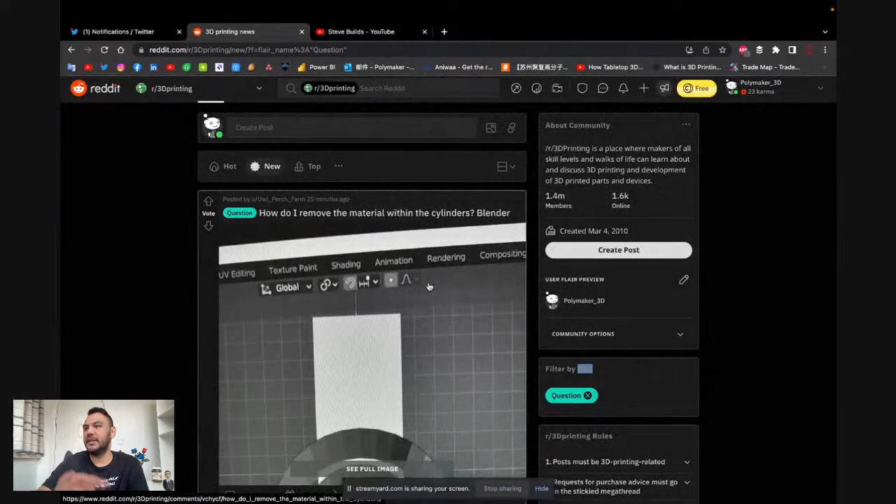Reddit. I don't think it's 3D print. Is that this one? Yeah, it's this one. They have like thousands of questions every week on this one. They have the question flair, I guess. I don't know why they call this flair. What's that? Does that mean topic? Flair definition: a special or instinctive aptitude or ability for doing something well. Okay, I don't know why they call this flair, but anyway. So if there is no specific question, then I will do like last time. We just go through Reddit, and then we answer all of the questions there. So I think we're good to go.

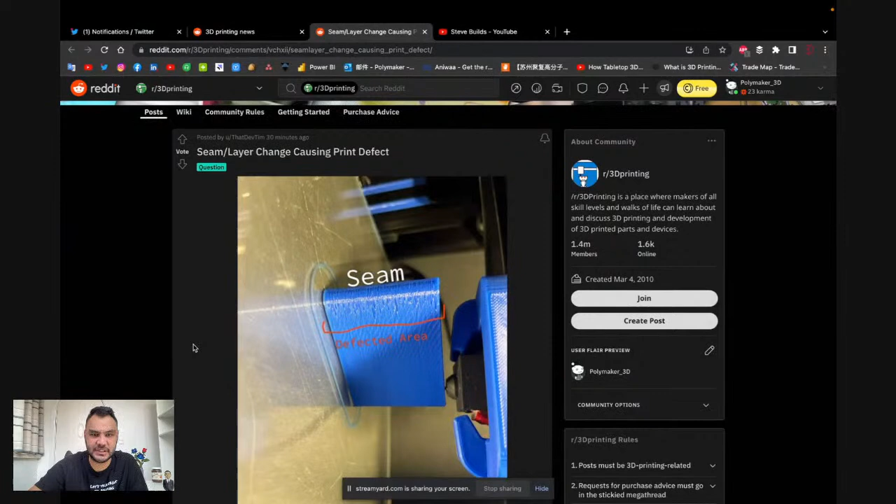Okay, so that's the defect area. Okay, so it looks like, yeah, I've seen this a lot. When you finish your layer, then it's under extruding, so you can see that it's actually starting to under extrude before it even finished the layer. And every time I see this, oh, by the way, you have some warping as well, looks like.

But when I see this, I'm always wondering whether it's the starting of the layer or the finishing of the layer. Is it the nozzle that has difficulties to build up the pressure when starting the layer, or is it the nozzle that has the extruded amount that is not enough to finish the layer? So let's see if there is a little bit more information.

Any help with me? I've done many Google research, not available, specific problem, blah, blah, blah. Looks like under extrusion and retraction so far. Okay, some stuff about retraction. Lower retraction, turn off coasting. Yeah, so they all assume. So my first question when I see this is always the same, because I've seen this a lot. And usually it's the end of the layer, usually.

Hi, Plastic Guts. Do you know which of your filament is the best for annealing? Which of the filament is the best for annealing? What does that mean? Sorry, I don't understand your question. Annealing is a process. How can a material be good at annealing? Do you mind putting a little bit more detail? I mean, there's a lot of material you can anneal for different reasons, right? Some for crystallization, some for releasing internal stress. But I don't understand what you mean by which one is the best for annealing.

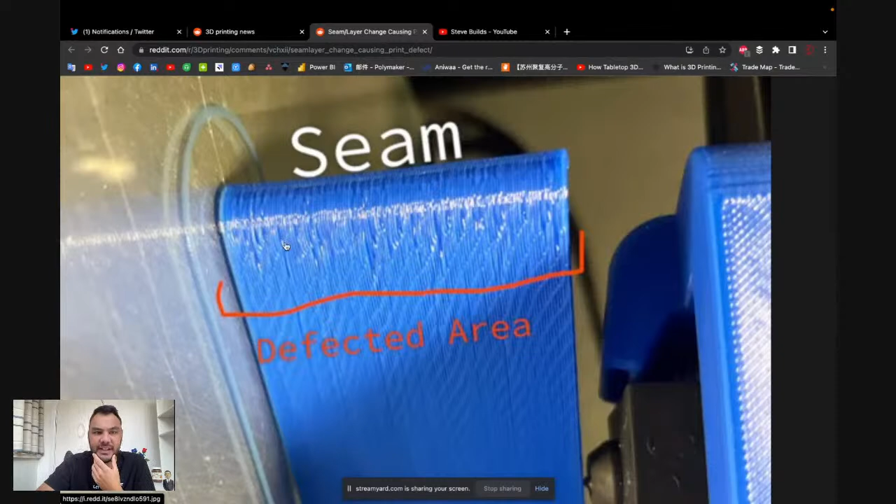Okay, so again, that's the first question I would ask, but it seems that nobody asked. So let's assume this is the end of the layer, right? So if it's the end of the layer, that means the pressure, the extruded amount is not enough. So it could be, let me check. It's definitely the material not enough to finish the layer. But what could be the reason of this type of under extrusion?

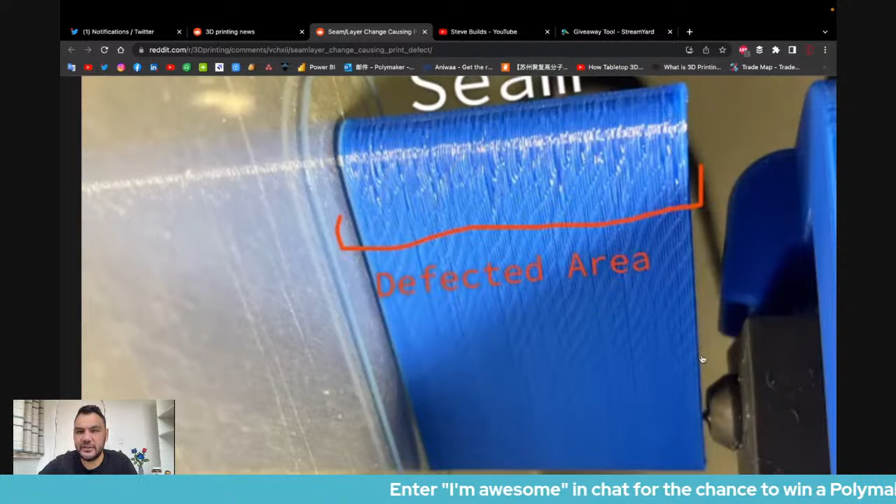If it's the end of the layer, I'm not too sure what could be the problem, but usually it's the end of the layer. And you know how you can check that? Actually, I think the ridges here on the side could indicate that it is going this way. So it looks like it's the end of the layer. But coasting, I don't think it's coasting, because coasting is usually a few millimeters, but it's starting to under extrude like a few centimeters before. So I'm not too sure. Let me check.

Okay, having a metalworking background myself, I know annealing as meaning to soften the material. I've noticed that in the 3D printing community, people use the term annealing to refer to baking their print to make it stronger. Okay, so your question is, which material provides the easiest, most user-friendly annealing?

Yeah, again, I'm not too sure. I've noticed that in 3D printing, people use the term annealing to refer to baking their print. Yes. So annealing in 3D printing has two meanings. Meaning number one, if you are dealing with semi-crystalline material, you put it in the oven and then you crystallize the part. So this is for semi-crystalline, and crystallizing the part will increase the heat resistance and some of the mechanical properties of the part.

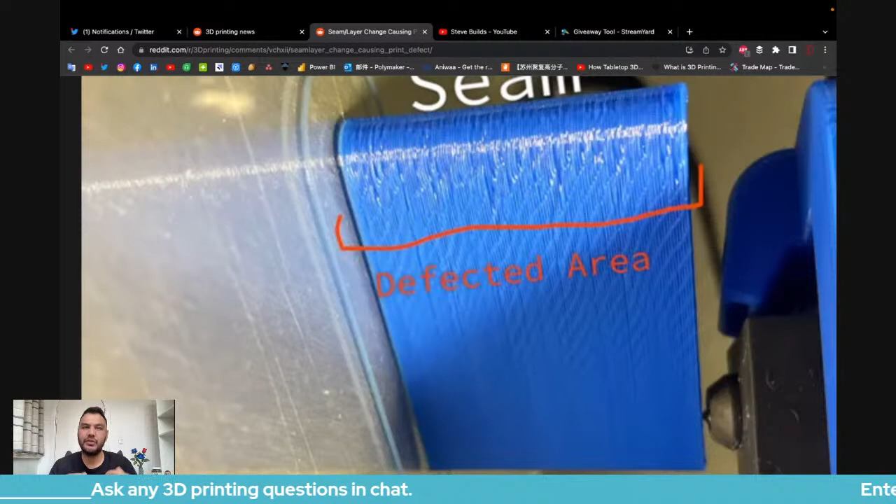For example, which one? I think our Polylite ASA white. If you notice, it has like a painting look, and because we had to make it very white, we had to increase a little bit the concentration of master batch.

Yes, I did mean which one would create the strongest mechanical properties. Okay, then again, one of the high performance materials, like maybe high temperature nylon or PEEK or PEKK or this type of polymers.

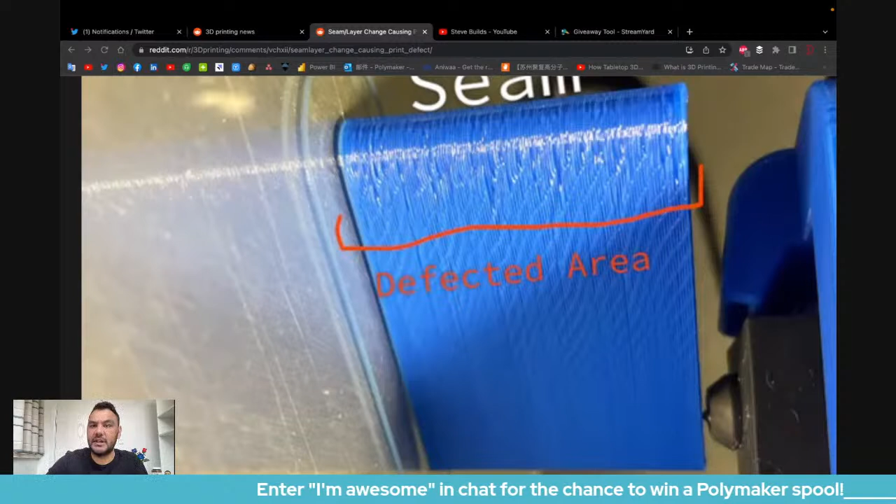No, you're not stupid. I just wanted to make sure I understand the question well. Is annealing two parts printed with the exact same settings going to result in the same dimension changes? Yeah, if it's the same material, if everything is the same, then yeah. If your printing setup is the same, the G-code is the same, the material is the same, and you anneal both, then they will both shrink in the same way. If it's for crystallization, then it will shrink. If it's for stress release, usually it doesn't change the dimension much.

Hey Caleb, am I late?

No, you're not late. Again, I don't know if you have some suggestions, but if this is the end of the layer, to be honest, I don't have a clear idea of what could cause this. In my mind, it starts the layer, no problem, then it goes all around, and suddenly, for some reason, it stops extruding properly. The G-code command is, you do your edges, and there is the right amount of material extruded. But for some reason, for the edges at the end, it doesn't have enough. So I'm not too sure what could happen here.

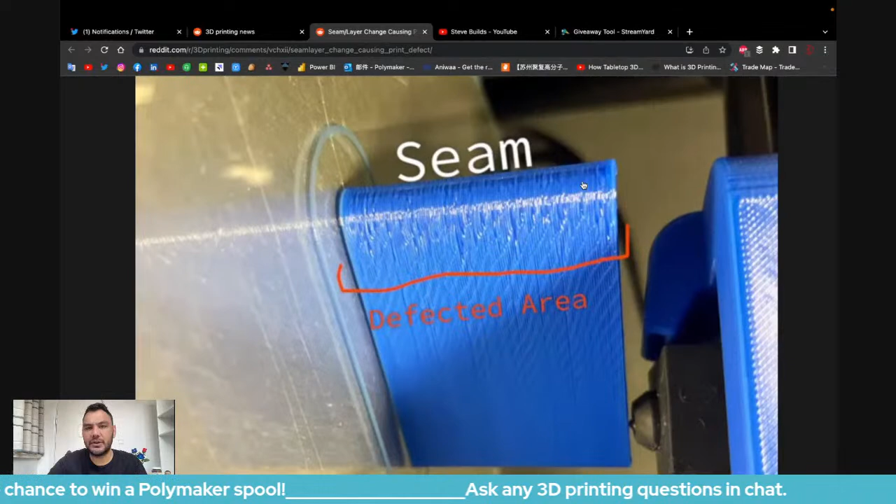Usually, when I see under extrusion, I recommend raising the printing temperature, and that usually solves the problem. So if a user comes to me with this, I will usually recommend the printing temperature. If it's the beginning of the layer, then I will talk about retraction; you need to be careful with retraction. If it's the end of the layer, I will usually only talk about the temperature, because I don't know what other things could affect this. Coasting, I don't think so, especially with that bad defected area.

Yeah, linear advance could be, but that's pretty severe, right? Or you have linear advance and it's not calibrated at all, and then you have this issue, because linear advance usually doesn't deal so much with under extrusion. I mean, yes, under extrusion, but not that severe. It deals with the thickness of your line width, right? But if it's that big an under extrusion, then there might be something else going on, or your linear advance is reversed, or it's completely not calibrated properly.

But I don't think he is using linear advance. Otherwise, I think he would have figured it out by himself. So that's my guess.

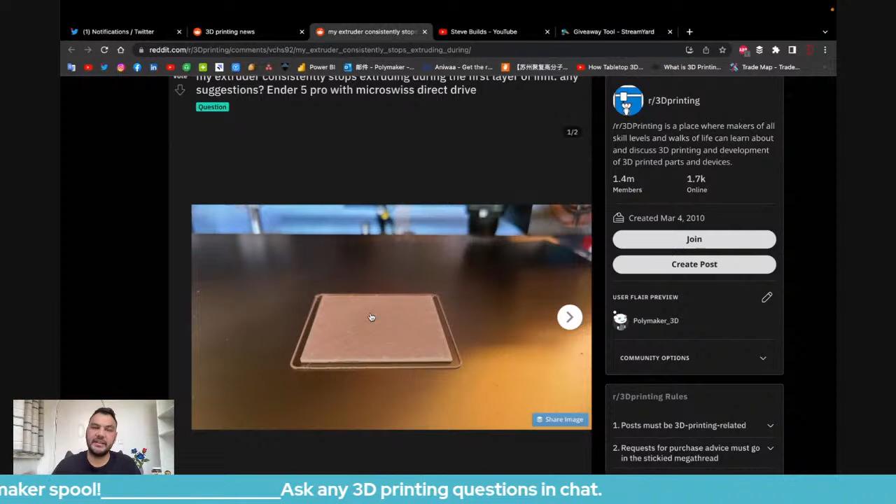Next one. My extruder consistently stopped extruding during the first layer of infill. Any suggestion? Okay, so what usually happens here is when you have your bottom layer that prints very well, and then... I'm dropping a little bit, but I should be back now.

So usually the bottom layer will have a certain speed, like 30 or 40 millimeters per second. I'm not talking about the Voron, right? I'm talking about a regular standard printer. The bottom layer should be around 30 to 40 millimeters per second, and then suddenly the infill is going to ramp up to 60, 70 millimeters per second. And usually, if your temperature is not right, it's not going to keep up with the speed. So what I would recommend here is to raise the temperature or lower the infill speed.

So the best here is to do the CNC Kitchen test so that you know exactly what your printer is capable of. And then you can check your G-code, or you can check your preview to see if the volumetric speed of your whole print is within what your printer can do. So that's the best way to solve this issue.

Just popped in to show support. Thank you very much, Vice. And I know I owe you some answers.

I'm getting there. I see wood graining, extruder vibration ending up in the print.

Do other people have issues with silk filament jamming? Yes, there are a lot of people that have this issue. Multiple reasons. There are some silk formulas that are more flexible than regular PLA, and sometimes the extruder has difficulty dealing with that flexibility. The other thing, if you're talking about our silk, especially if you're used to our regular PLA and then switch to our silk, there is a major difference.

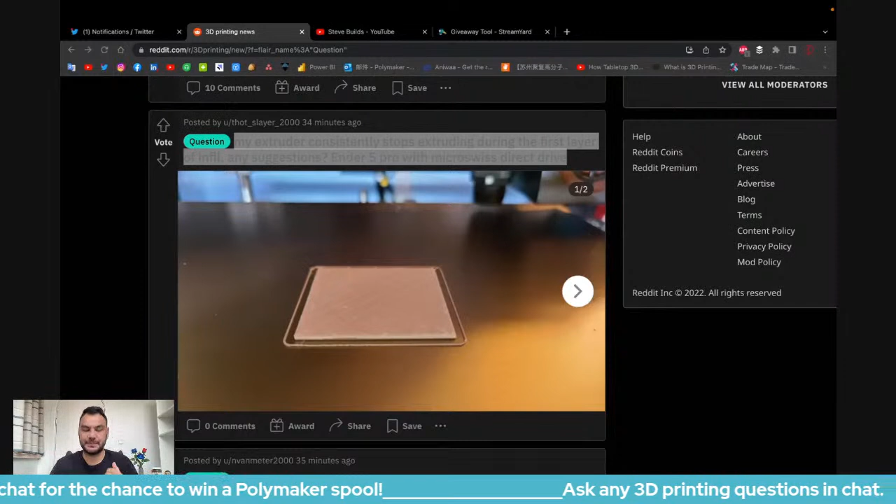Our regular PLA has jam-free technology, which means the heat resistance of the filament itself, not the printed part, is 140 degrees. So this PLA can be printed in an all-metal hot end or at a very high temperature without having too much heat creep issue. But the problem with our silk is that it's a regular silk. It doesn't have jam-free technology. So if you're used to printing with our PLA and then suddenly change to silk, you have to be more careful with heat creep than with our regular PLA.

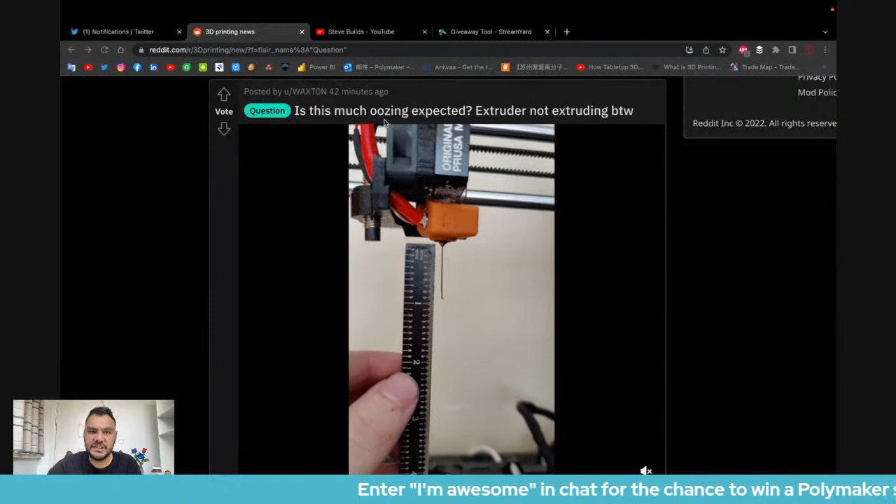Is this much oozing expected? Extruder not extruding, by the way. Well, it depends. It's hard to, in this case, let me think. So this is interesting. We can try to understand why the filament would be extruded but the extruder is not extruding, right? Do you remember we were talking about if you extrude a certain amount, then you have the same amount that comes out? And now we have nothing that is pushed in, but we have something that comes out, right?

So in my mind it's like this: the system had pressure. You can think about the printer extruding the filament, and then the nozzle slowly cools down to a point where it cannot extrude anymore, but there is still pressure from the extruder. So even if the extruder is not moving, you still have residual pressure in your setup. Once you start a new print, you raise the temperature, and as it rises, all of that residual pressure will be enough to start extruding the filament.

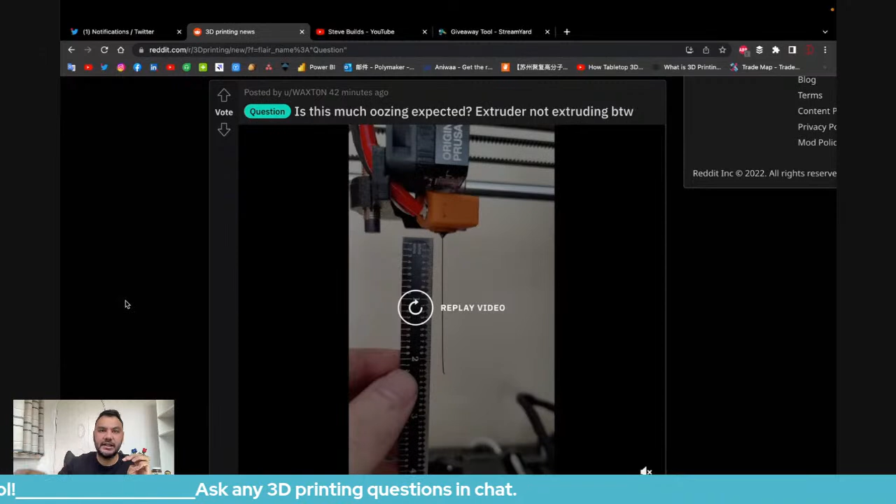So whether it's expected or not, I don't call this oozing, because during 3D printing you are going to do a retraction. If you do a retraction before and then check the oozing, that's the kind of oozing you could check if you are designing a new shape of nozzle. Remember last time we said nozzle design is very important for oozing? Then you can do this test, but don't just heat up the nozzle and check what's coming out. You have to do a retraction before, get rid of the residual pressure, and then check whether it's big or not.

Wouldn't that be dependent on the viscosity of the molten filament? Yeah, definitely. You have a residual pressure, and the pressure required to extrude the filament depends on the filament viscosity. When you start your G-code, one of the first commands is to heat up the nozzle. As it heats up, the viscosity goes down, and at some point it's low enough that the residual pressure can push the filament out, extruding more and more until you reach equilibrium inside, and then it stops extruding.

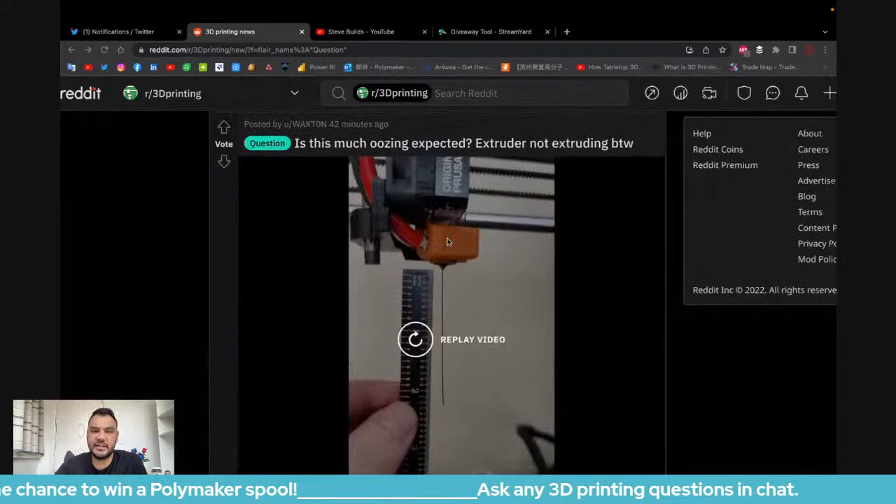What I do to avoid oozing is do all my calibration with the nozzle at 180 degrees, then only heat up directly before my purge line. Yeah, I'm not sure if we call that oozing at the beginning, but I guess yes. I guess that's the beginning-of-print ooze.

And when you have a small island, the flow is much harder to manage. And in this case, you're printing a marble, so it could be that in this small island it is much easier for the marble to accumulate. Why? Because you're extruding a little bit, so you're pushing, and then you are retracting, pushing, retracting. So you're kind of accumulating all of this small powder in the nozzle, and maybe it can partially clog your nozzle, and then once you re-extrude again, it will be fine again.

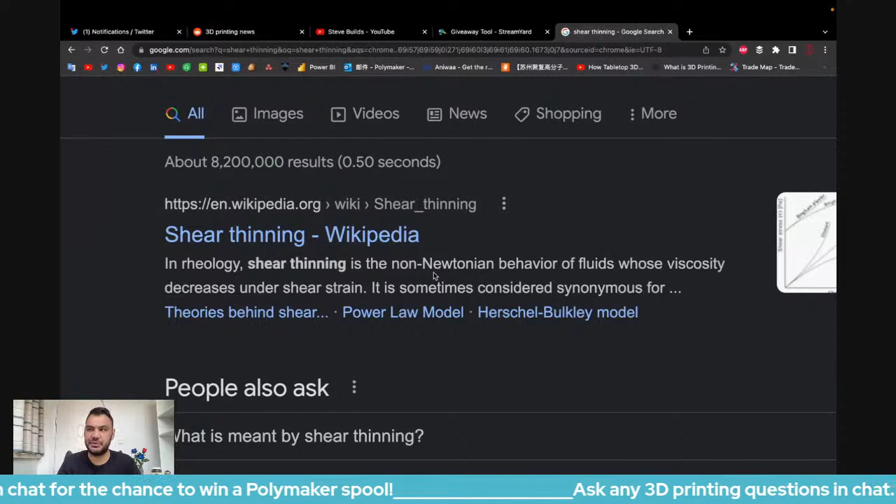The effect of shear thinning for Polytera is higher than regular PLA, which means Polytera would require a lot of shear stress in order to flow properly. And what does that mean? It means that if you stop extruding, then it won't ooze, not as much as other PLA. So you don't need a very high retraction. So that could be the idea. That would be the first thing that comes to my mind on why Polytera would require less retraction than a regular PLA for the same result.

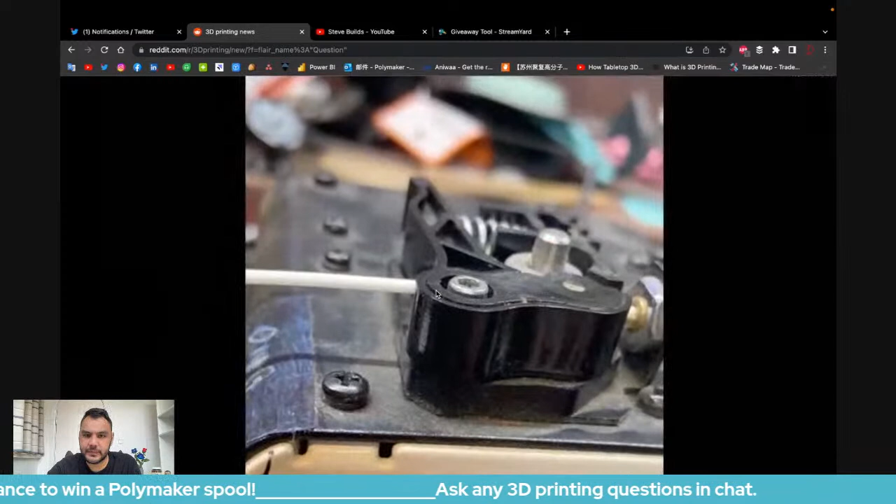New to resin, why does the filament keep jumping? Oh, okay. So extruder skipping. Extruder skipping means the viscosity of the filament is too high to be pushed at that pressure. So again, you do the CNC Kitchen test so that you can understand the limitation of your printer. You have that, or you have a nozzle clog, or a nozzle jam. Jamming means the material expanding in the cold end, and a clog means you have a carbonized polymer in the nozzle that is clogging it, or he's printing with marble or any particular effect filament. So it could be one of these.

Either your printer has reached its limits, or your printer has jammed in the cold end, or the nozzle clogged. So it's one of these, so you can check. Or the nozzle is too close to the surface. Yeah, that could also be it, basically something is blocking the exit of the nozzle.

Hi, I'm new to 3D printing. Can someone help me fix this problem of shifted levels? My specs are in the comment. Thank you. Shifted. Okay, so I guess he's talking about the layer shift, right?

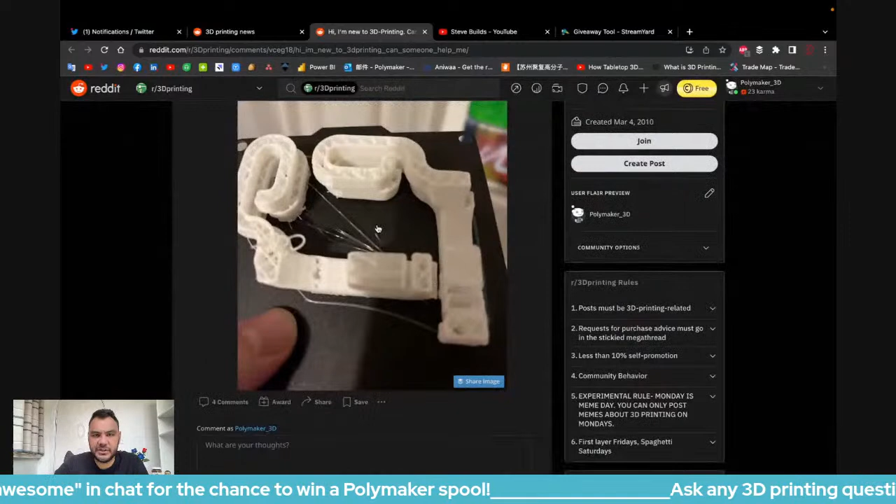It could be a very weak stepper motor that didn't handle one of the jerk moves, which means the instantaneous speed change at some point, and then they just skipped, or the nozzle got caught on a curled surface, and if the stepper motor is very weak, then it doesn't take much for the stepper motor to skip steps. So I would lower the jerk. I would double check if there is any curling on my print that could have caught up in the nozzle, and then that's how I would solve the problem. But I think mainly it could come from the printer.

What I guess is the print that came out fine most likely was some small print. When you have a bigger print, then you have a higher risk of having that layer shift issue. That's my guess on this problem.

Okay, what is this? See full image. Well, how are we supposed to troubleshoot this image? There's nothing. Most likely his problem is a camera problem, not a printer problem.

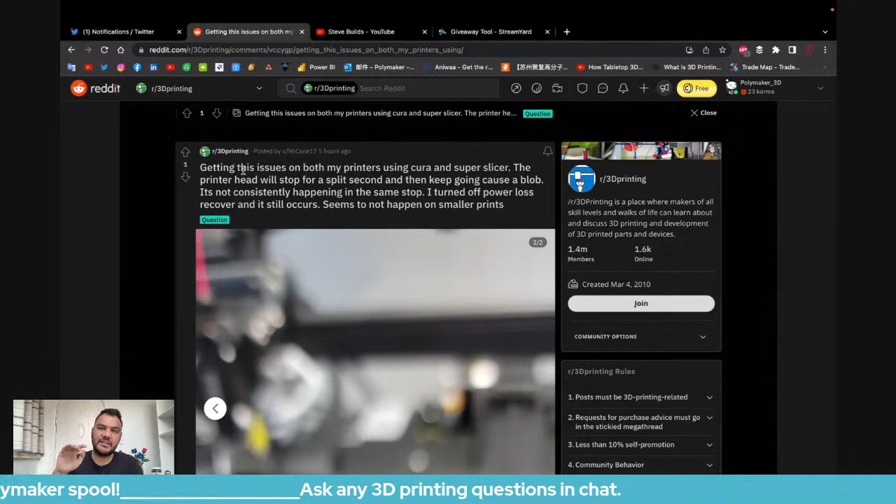Okay, so I had this issue when I was trying to print our TPU95 HF, the high flow TPU, on an Ender 3 at a very high speed. So I printed in vase mode, printing TPU95, and I think I reached 150 millimeters per second, and then it would just print TPU in circles like this. And then when I started going higher in speed, somehow the print head started to stop a little bit. I could feel that the printer struggled to maintain that circular motion at high speed. And then I started to have these small blobs here.

So maybe he's pushing the printer to a point where it doesn't handle it, and it seems that he's printing, I'm not sure, but it could be vase mode, and maybe he's pushing the printer to the speed limit, and then somehow it will start to skip some stuff, and then it will stop a little bit and then continue. So that's my experience with the Ender 3. When I print in vase mode very fast, it will start to stop, and then I have these blobs that accumulate. So I'm not sure what print speed he's at. But when I watched the printer, I had the same issue, and that came from there.

Jonathan, do you guys measure the opacity of your filament? I was doing a project where I was switching after only 2 to 3 layers and was having color bleed through problems with some filaments. So the first question: do you measure the opacity of your filament? No, we don't measure that.

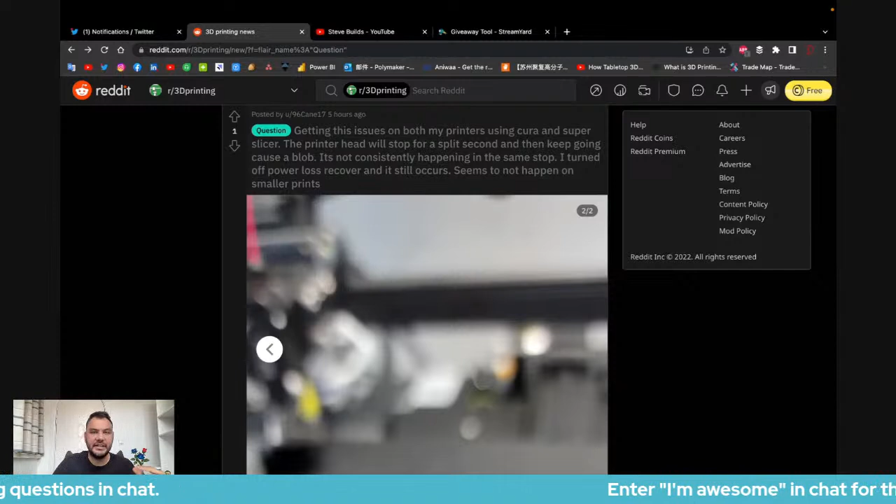Sorry, what do you mean? Do you mean you print 3 layers, then you stop your printer, change the filament, change the color, print again, and then the color that you just printed started to bleed through the first layers? Really? I don't know. I've never experienced that. So, for example, you're printing white, 3 layers, and then you switch to black, and then the black will start to contaminate the white, and the white will become a little bit black. Well, I've never experienced that.

This is very strange to me, because with polymers, the color master batch, if you have one layer in black and one layer in white, they shouldn't share or transmit the color in some way. So I'm not too sure. Black to white, yes. White showed the black underneath. Oh, you mean the color doesn't bleed into the other layer. It's just when you look at it with the light, you can see through, right? Like you can see the black through the white. I guess that's what you mean, right?

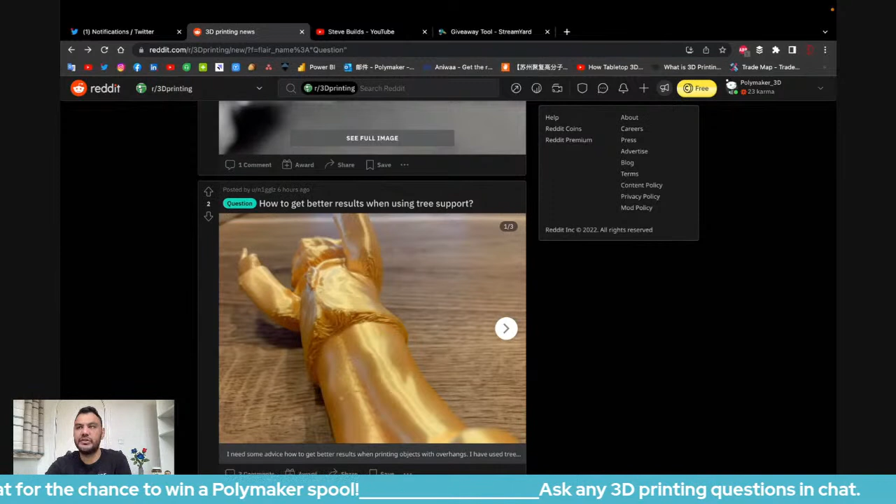So if you're looking to do that without that problem, then I would recommend switching to a more opaque material. So I'm thinking Polyterra PLA. I'm thinking Polymax PLA. Polymax PLA is also a special formula. It's not translucent. Polyterra PLA. And then Polylite PLA, no. PETG, definitely not. Yeah, so I would recommend these two. We don't have a specific test, but if you're asking me which ones are opaque and which ones are more translucent, then I can answer.

Maybe the control board bandwidth is saturated by too many instructions per second. Decreasing the resolution of the model a bit can help. Circles are made of many small segments. Oh yeah, that's also a good point. The amount of commands your board can handle. So if you have a vase mode and you use a lot of subdivisions for the edges, when it slices, one circle could have, I don't know, 200 commands. Then you can lower that circle to 50 commands, and maybe your board can handle it. That's a good point.

Sounds like the wall was too thin. I'm not sure about that one, because it's really the hot end stopping, and that's why it's over extruding. So I'm not sure regarding the wall size.

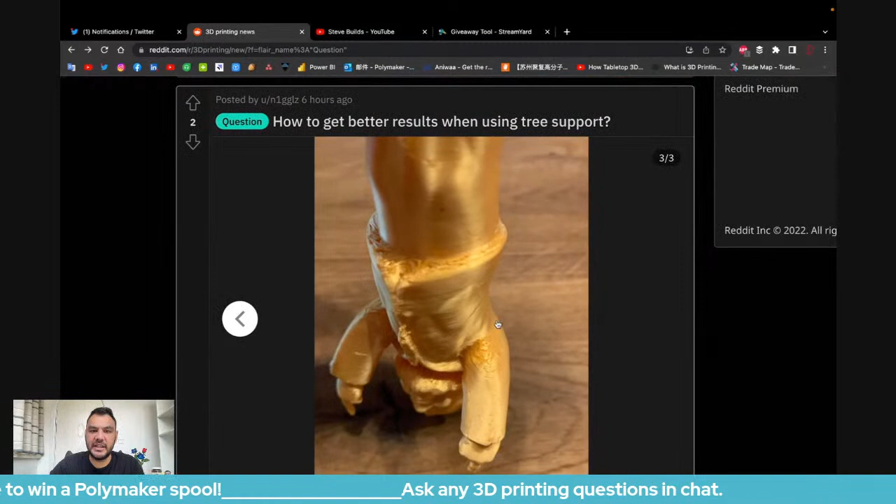The next one: how to get better results using tree support. To be honest, I'm not a big fan of tree support if you want a very good surface finish. What I don't like with tree supports is it's a little bit like SLA. If I remember well, tree support only has points to support your structure, but I prefer having a surface to support another surface instead of points supporting a surface. So if he was using tree support and wants better results, my feedback is don't use tree support. Use regular support. You should have better results.

But I'm not a big expert in tree support because I just don't like it without even trying it. So that might not be the best, but that would be my recommendation here. I know with regular support you can get much better. I don't know if with tree support you can get much better.

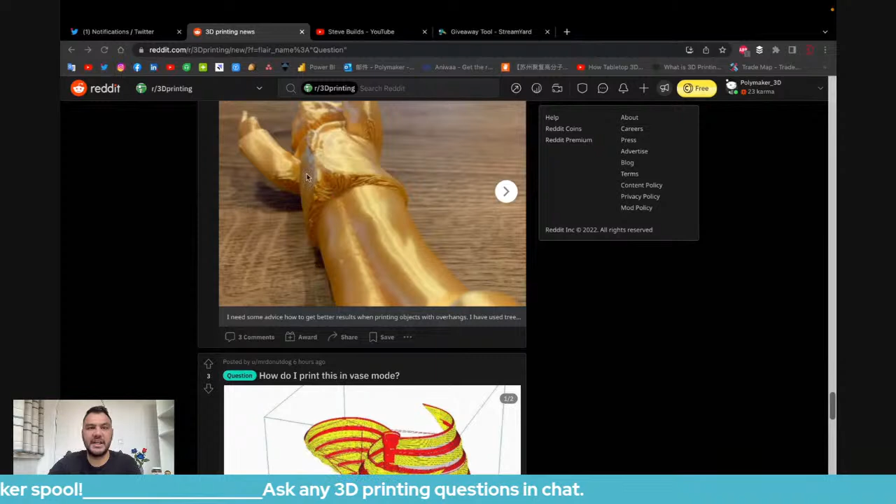Okay. Bridging issues cause that. Yeah, that's why with tree support you'll have that. What I like is regular support with support interface. It's difficult to remove, I agree, but the surface quality is very good. So that's my favorite, support with support interface. I don't know if tree support can have a tree structure and then do bridging for the support interface, and then have a nice support to print on top. That would be awesome.

Yeah, it really depends on the filament. Like you said, this could be measured by shining light through and measuring the amount of light that hits the other side. Yeah, we could. We have a color machine, but we don't have an opacity or translucency machine, and we haven't received much demand for that particular data. But I can definitely help you find our most opaque filament just by experience, just by looking at the raw material itself.

Tree support can support the inside of the model without touching the model. Yeah, that's true. You can print a big overhang with tree support and support the inside of something. Tree support: material saving, time saving, easier to remove. Okay, material saving and time saving go together, I guess. And easier to remove because it only has these points of attachment, right? I guess.

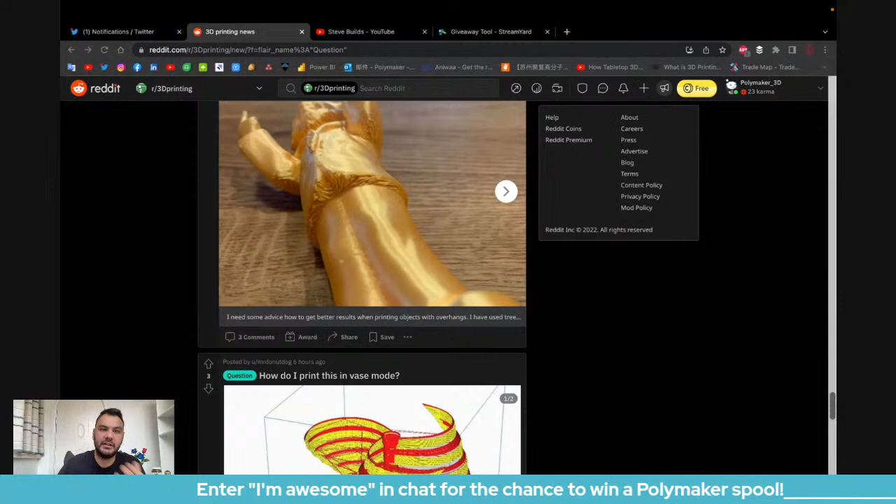And for me, this setting has worked with pretty much everything, and I just keep that one. Oh, 1 millimeter horizontal expansion as well. And this setting has worked for everything in my experience.

Okay, next, how do I print this in vase mode? What is this? Okay, let's have a look. Oh, okay, got it. So you can print this in vase mode depending on the thickness of that wall. If the thickness of that wall is, let's say, 0.7, 0.8, maybe

0.6, then you can print this in vase mode, because you will basically go one way and then come back the other way, and then both will be a little bit under extruded, but I think Cura knows how to compensate for that, and then you can have this in vase mode. So there's basically nothing to do.

But what I can see is the walls are too thin. So let me check. I have no idea what the yellow one is. I don't know why you have yellow and red. That's a little strange. But when I see the STL, then yeah, it should be. I don't know if the thickness is changing, but if the thickness is the same all the way, it's just wavy, then you can print in vase mode.

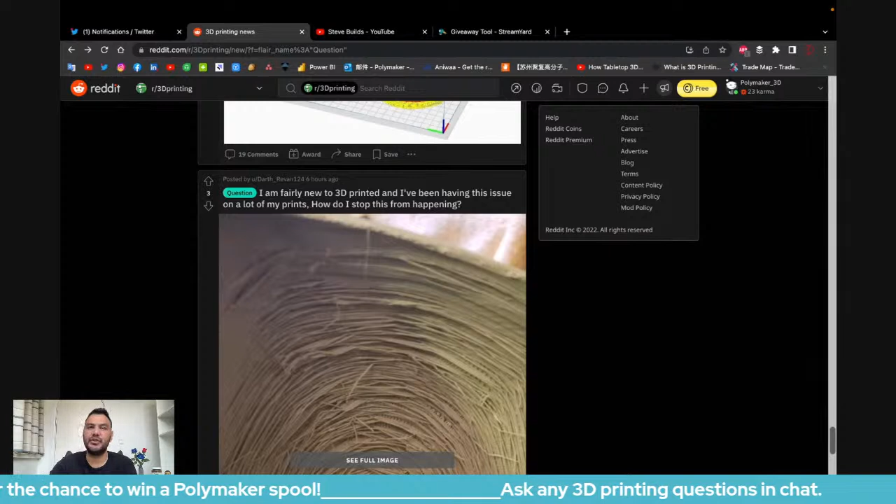Yeah, we have TPU 95, TPU 90, and TPU 95 HF.

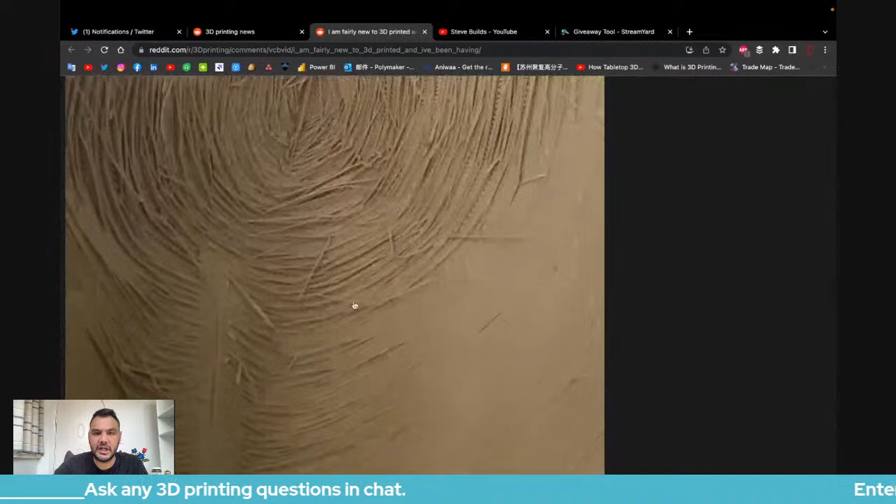The way you solve this is the same way as you improve your overhang, which means higher temperature, lower speed, good cooling, more shells, this kind of thing, and then more overlap between your shells. So all of these recommendations that you give for overhang, you can do the same here, and you're going to solve that if you really don't want to print support, because I understand that if you print support in a helmet, that's a huge waste of material and time.

But yeah, that's how you would solve it. So I repeat, higher temperature, lower speed, more shells, more overlap between the shells and better cooling. These are the things that come to my mind to solve this issue.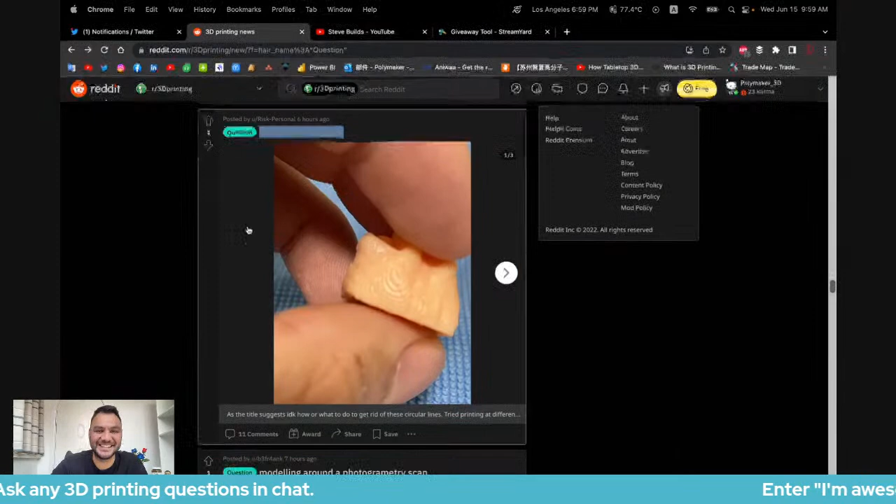So the website says 30 to 60 millimeters per second for TPU90. That seems very high. So TPU90 is also based on the high flow technology. Why we didn't call it high flow is because 30 to 60 is still not very high, but it would depend on your 3D printer. If you have a direct drive, TPU90 is based on the high flow formula, so it should work well. 30 millimeters per second is if you have a Bowden, because it's still very flexible. So you will still have some issues, but it will be much better than another 90.

So 90 and 95 HF are both based on high flow technology, and they are both UV resistant. And that's something a lot of people don't know. And I'm wondering, did I put that on the website? Let me check. Maybe it's my fault. TPU90 and TPU95 HF. Did I put it? Yeah, I put it. Maybe I should put it in big. Maybe I should put it here.

But TPU90 is easier to print with, similar flexibility, high melt index. If you go and check the melt index of TPU, I will show you. And then it has a high resistance to sunlight and UV light. So a lot of people talk about ASA, blah blah blah, but TPU90 and 95 HF display excellent sunlight and UV resistance. There is UV stabilizer in our TPU. So just something if you didn't know.

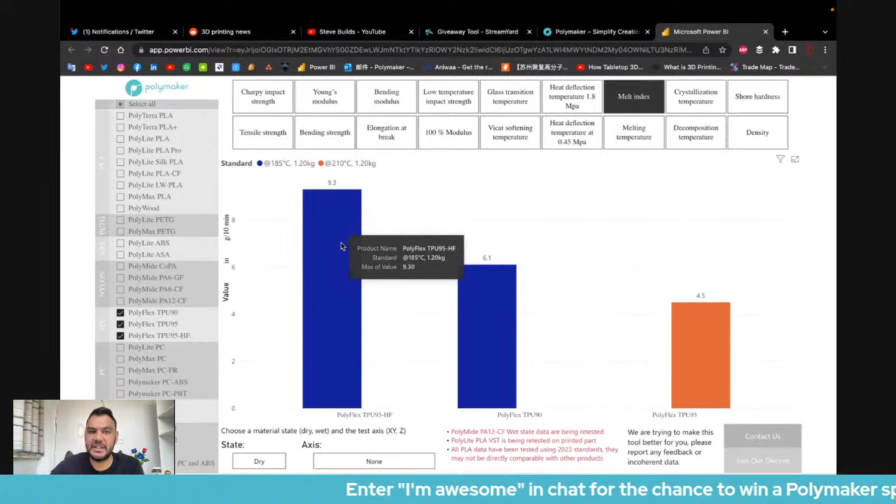And then if you check the melt index of both TPUs, you can see our regular TPU95 is 4.5 grams per 10 minutes, and that was tested at 210. And these ones are so high flow that we had to test them at 185 degrees. For the same amount of force, but 25 degrees less, TPU90 is producing 6.1 grams per 10 minutes, and TPU95 HF 9.3 grams per 10 minutes. So these are really high flow TPUs.

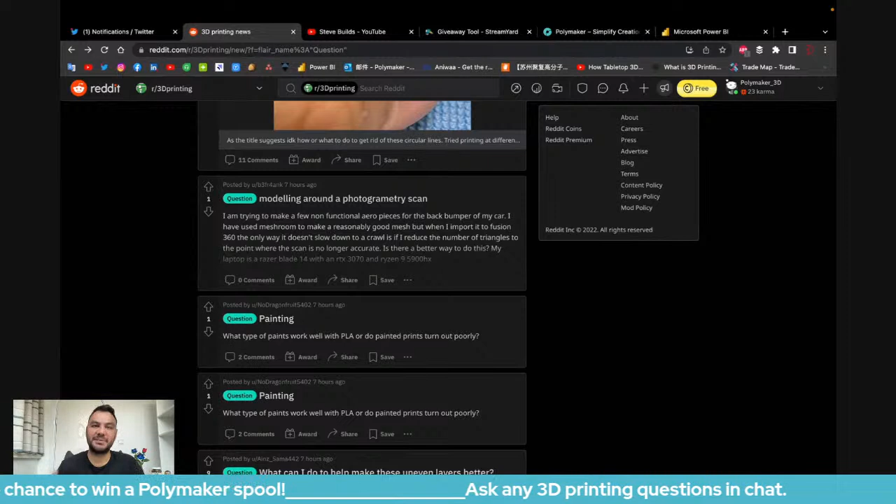I printed it in vase mode, and I wanted to reach the point where I under-extruded the filament, but I reached the point where the printer couldn't keep up with the speed instead of the material. But again, that was without retraction. That was in vase mode.

A few days ago, watched an English dub, sci-fi, blah, blah, blah. That's why I'm not even opening my good nylon until I have a use. Yeah. Scares me. Thanks, Nicolas. Stream went great. You're awesome. Thank you very much, 3D HP.

Nothing as nice as the 3D Vo. Want something I wouldn't mind killing, adding random stuff to PLA. Cheetos PLA. I think CNC Kitchen made a coffee PLA. I think he ground some coffee beans and then he mixed it with PLA.

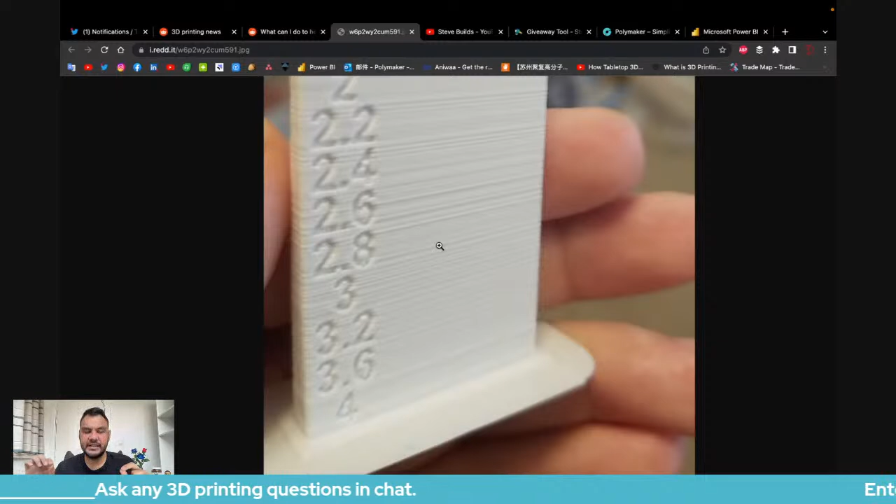What can I do to help make these uneven layers better? Well, let's check the picture. Okay. Yeah, that's a printer issue. There are two videos from CNC Kitchen that go through this specific issue. I think it had to do with belt tension, if I remember well, and the bed heating cycle. Belt tension, bed heating cycle. I don't remember if there were other things, but I think those were the two main things.

I don't think any particular material setting will help with that. I think it's definitely printer maintenance that would solve that issue. That's my guess. I don't know if you guys have some other ideas here.

Do you recommend any different print settings for your glow in the dark versus regular PLA? Print settings should be pretty similar, maybe a tiny bit higher temperature, like 225. But the most important is to use a hardened nozzle. So if you are going to use a hardened nozzle, like a stainless steel nozzle, the problem would be that the temperature won't be transmitted to the material very well. So you will have to print at an even higher temperature.

So if in a regular brass nozzle you print at 220, 225, then on a hardened nozzle maybe 230, 235 to compensate for the heat transfer capability of your nozzle.

But yeah, slightly different. Polymaker, looks like you got your VPN issues solved. Not really. It's the same setup. Everything is the same, but sometimes we are lucky, sometimes we are not. So it seems like today we are lucky. So it's good. Let's just enjoy the day. I only print in Polymaker Plus. Yeah, we should release Polymaker Plus. I will post on the Discord after semester is over, exam is near. Oh yeah. School first.

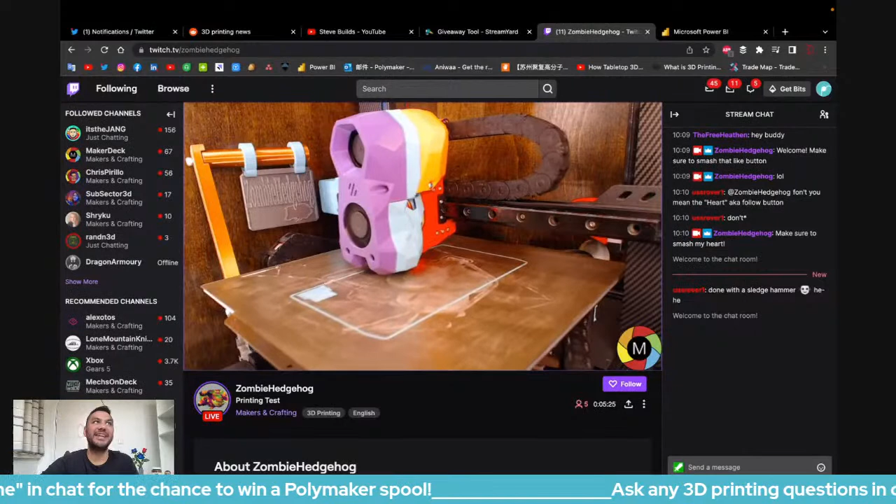Nick is streaming with Internet Plus. Yeah, definitely. Today we definitely have an Internet Plus. PLA Plus Infinity for the win. PLA Pro. Yeah, PLA Pro is a good name. PLA Pro Professional. Okay, let's continue our troubleshoot. Can I do something like this, and then this, then this, and then something like this? Yeah. How good is this? Perfect. Now we can have a look at our TPU 90 print at the same time. Well, that's an Internet Extra Plus Max, right? I'm looking at the stream. I'm streaming. I'm on Reddit. I'm opening some tabs. What's happening? We're very lucky with our internet today. Let me close this one. Let me put this one here. Let me close that one, and let me close this one.

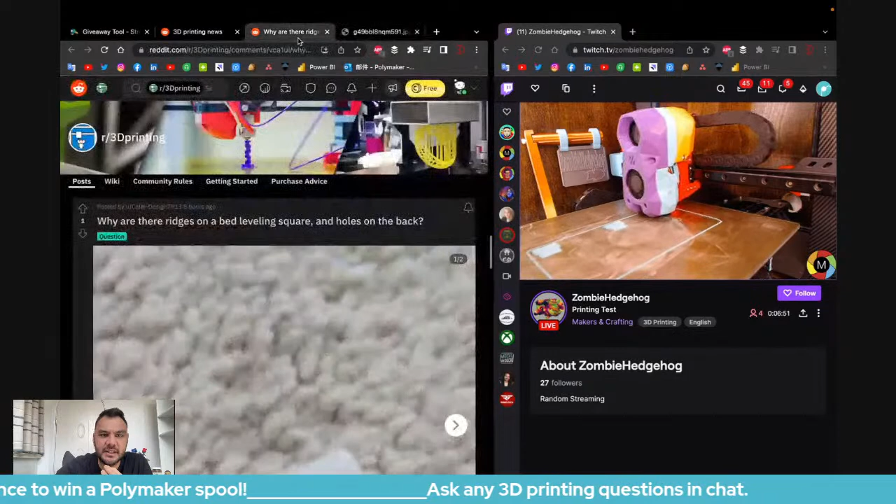Okay. Why are there ridges on the bed leveling square and holes at the back? I don't understand. Oh, okay. So he's asking why you have this strange stuff here, and then why you have the holes at the back, right? But this is just over extruding. Either over extruding, or your nozzle is too close to the bed. Most likely your nozzle is too close to the bed when you're looking at how it's printing. It's like squishing down the material.

I mean, it's pretty good if your goal is to have good bed adhesion. But sometimes squishing it too much will mess up your bed adhesion. So I would just recommend a little bit of a Z offset if you don't want to re-level your bed, or just re-level the bed so that it's a little bit further away from your nozzle. But the bed seems level, so I would just do a little bit of a Z offset on the slicer to solve that problem.

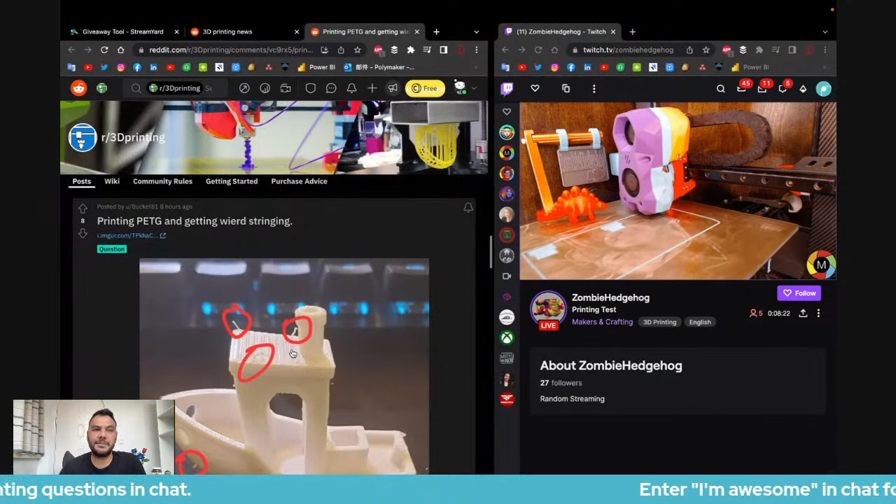Benshi, let's go. I did the email I sent you, help browser with built-in VPN, help you. I tried a few of them. Unfortunately, they are less stable in China than I would have thought. The Astrill is really the most stable one, and somehow is working well with Chrome. I tried Safari as well, and I tried some of the ones you had with the embedded VPN. But I've had more luck with this. What we can do is, if we have a stream where we're not very lucky with the internet, then I will switch to the one you sent me. There's a couple of them, and see if when one is not working, the other is working. That would be great. Then I can just switch back and forth to the one that is working the best.

It's the build plate. Yeah, I think so.

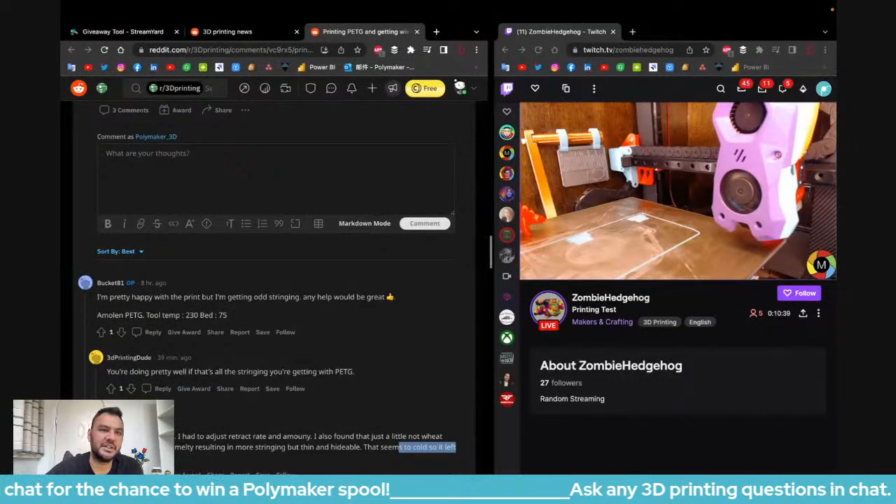So no. So when I adjust retraction, I also found that just a little bit, blah, blah, blah, plastic melty, blah, blah, blah. Okay, only 2 recommendations, and none of them is talking about drying. So I guess I'm wrong. But yeah, if someone has a PETG oozing or stringing issue, then I always say the same thing: dry your filament.

And oh, the print is finished. So did it fail? I missed it. Did it fail? Oh, it's watched over by one of the awesome dinosaurs. Oh, I missed it. Did it fail? Okay, let's see what's gonna be the next print.

Yeah, so I dry the filament, retraction, but that's some strange... What is this kind of stringing? What is that? Wait. How can he have this kind of... wait? Where does that come from? Let me think. Let me think. Where does that come from? How can he have this thing that goes vertically?

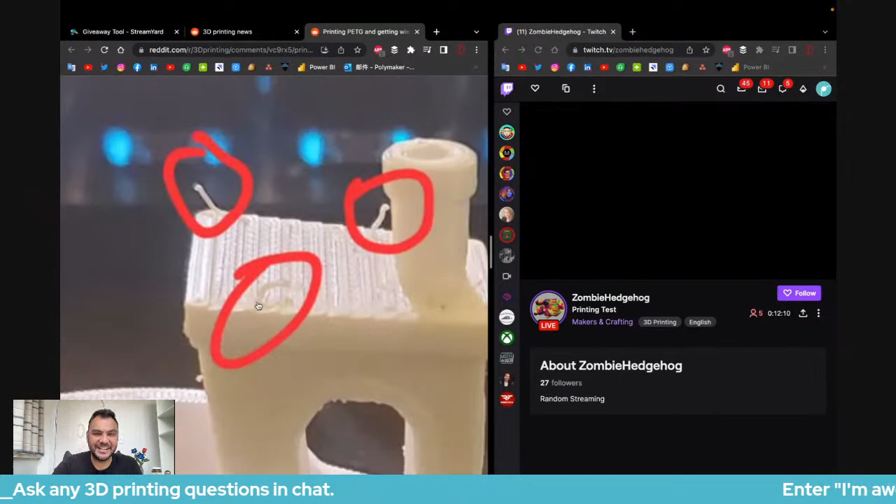Hot air gun will take care of stringing. Yeah. I mean, you can solve. I mean, these are not stringing. These are like, I don't know, the filament growing by itself. I mean, this filament is alive. I don't know. Maybe somehow during the print. I don't know, because I can see that you always have this kind of thing that is stuck on your nozzle, right? And then later in the print it's gonna be transferred to your print. But like three of them like this, and then vertically, I have no idea.

Usually, the best in this case is you print another one, and then you just look at it. Whoa, yeah, yeah, that's a zombie. That's definitely a TPU common issue. Well, I guess you just proved that it's not that high flow, right? I don't know what happened, but what printing temperature are you at? Yeah, I don't know. Sorry for this one. I have no idea where this kind of thing can come from.

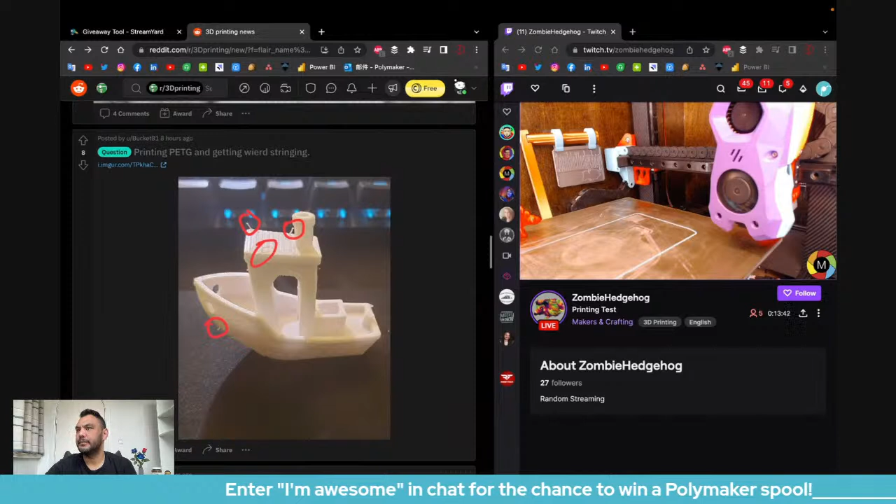I would just print it again and just look at it, and then see where that comes from. I guess it's something that is on the nozzle, like in some other part of the print. It's on the nozzle, and then it's just deposited somewhere else in the print. That's my guess. Plus 10 flow is a no. Yeah, I think CNC Kitchen would be great on that one.

Z hop, no retraction. Yeah, if there is Z hop, then it would have... Z hop makes stringing worse, especially with PETG. So if he had Z hop activated, then the print would be really worse. As the hot end lifts off the print, Z hop. Yeah, I'm not sure it's a Z hop. Extruding too much could be, but then the whole print would have it.

Yeah, I'm not sure. I see it sometimes with PETG that hasn't been dried. Yeah, definitely. The first thing I would recommend is drying PETG. But for this particular thing here, I guess that would be solved with the drying, because I think that comes from artifacts from the print, and I'm pretty sure drying would solve that.

Okay, looks like we are ready for another TPU print. I cannot figure this out. I like the picture.

I like the picture with the title. It's like a very simple picture. Okay, so

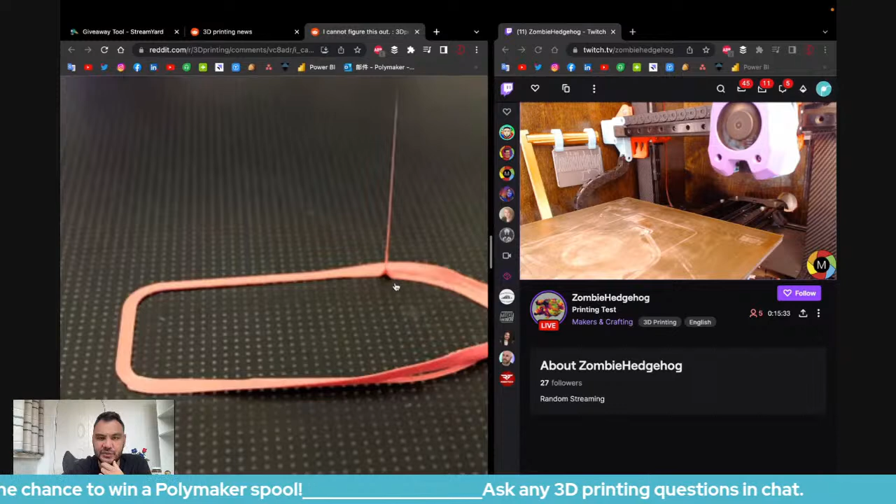Yeah, I guess bed adhesion is what's wrong. This is a skirt. I guess it's, sorry, a brim. My guess is a brim, because it goes from the outside to the inside because the print stopped here. So this is a brim, and then print hotter, print slower. Maybe add some glue stick, but it seems to be a textured bed, so it shouldn't need it.

Bed at 55 degrees, print, if it's PLA, at 220, 225, the first layer at 30 millimeters per second. Make sure you don't use the fan. All of this stuff for bed adhesion, and I think that should be fixed. 225. Yeah, 225 should be good, but I'm guessing a 90% flow in the slicer. So what's the volumetric speed that you are trying to achieve?

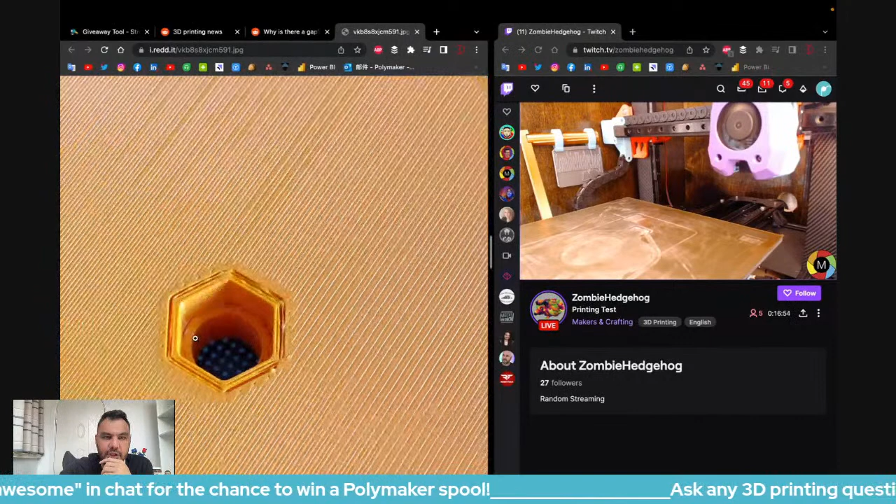Why is there a gap? Okay, where is there a gap? Let's check. So, where is there a gap? Oh, okay. Huh, interesting. Well, definitely under extrusion here, but now the question is why here it's printed well and here it's not printing well. Interesting. So that's the top layer, right?

I mean, it's definitely under extrusion because even on the top layer, you can see the gaps between the lines. So he's printing at a too high volumetric speed for this printer. But I'm just surprised that here it's really struggling compared to here, because the settings are the same. This is the inner shell, and here's the outer shell.

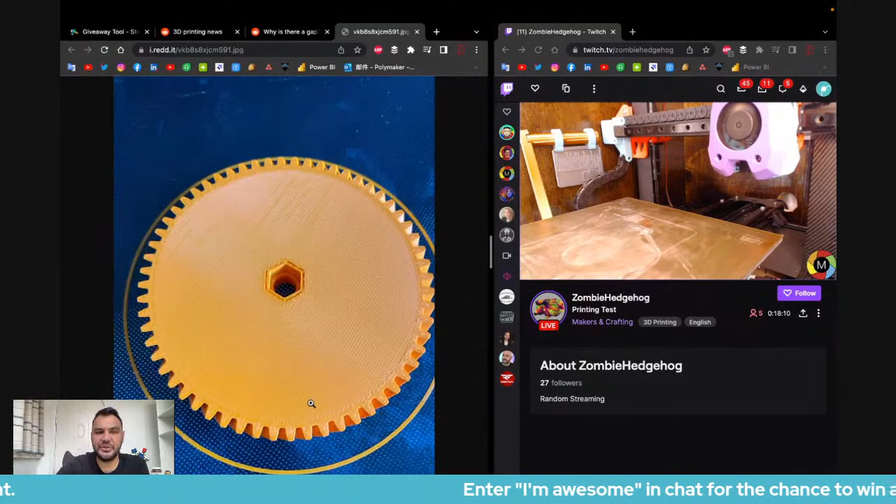But here the inner shell is a little bit compensated by the infill, like the top layer. But here it's not compensated by the top layer because it loses all of this. So my guess is just volumetric speed. Just decrease your printing speed or increase your printing temperature. That should solve this. Or calibrate your printer: E-step calibration, depending on which team you are, slicer flow calibration, or E-step calibration. We had a lot of discussion around this, so I'm not gonna go into the details.

I haven't tried Polymaker filament yet. Atomic and Prusa are my go-tos. Would love to hear what Polymaker does differently, and if there is any practical or engineering filament I should try from you. Well, that's a whole stream topic, right? So a quick summary. How would I put that? So we create filaments in order to solve problems. Our filaments are based on a lot of different technology that we're trying to develop to solve 3D printing issues. I'll give you some examples.

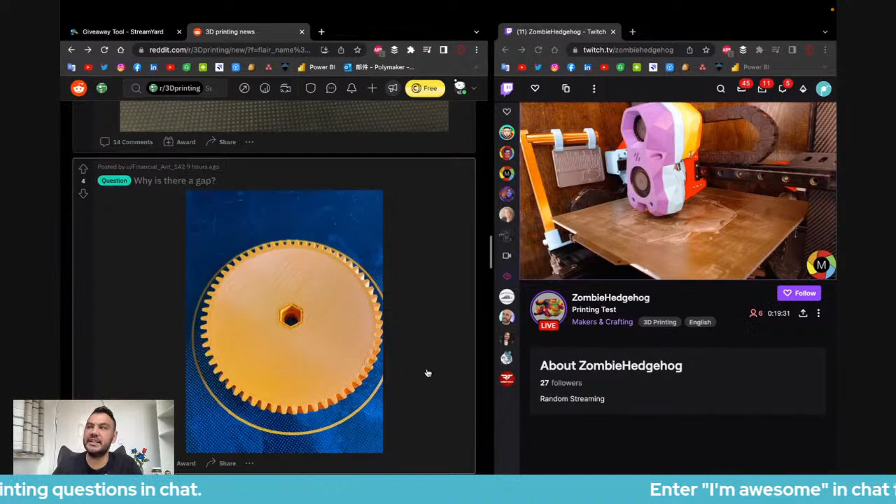One of our first filaments was Polymax PLA. So we solved the brittleness of PLA. You've seen a lot of PLA plus, PLA tough, this kind of thing. We were the first one that released that type of PLA, which is called Polymax PLA, and it's still available today. Wood filament. You've seen a lot of wood filament out there, and they all have the same problem. They clog the nozzle because of the wood powder. We solved that problem with the foaming technology. So we have a wood filament that doesn't have wood powder inside, but it mimics wood because of the foaming technology.

So nano reinforcement technology, stabilized foaming technology, and then we have, for example, Polysmooth, the very first of its kind. How to smooth a model without using nasty chemicals like acetone. So we developed a filament that is as easy to print as PLA, but can be post-processed with IPA, alcohol. And that's our layer-free technology. And when it comes to nylon, all the fiber reinforced nylon, we developed a fiber adhesion technology, to make sure that the fibers adhere well to the matrix polymer. And that's also a big difference.

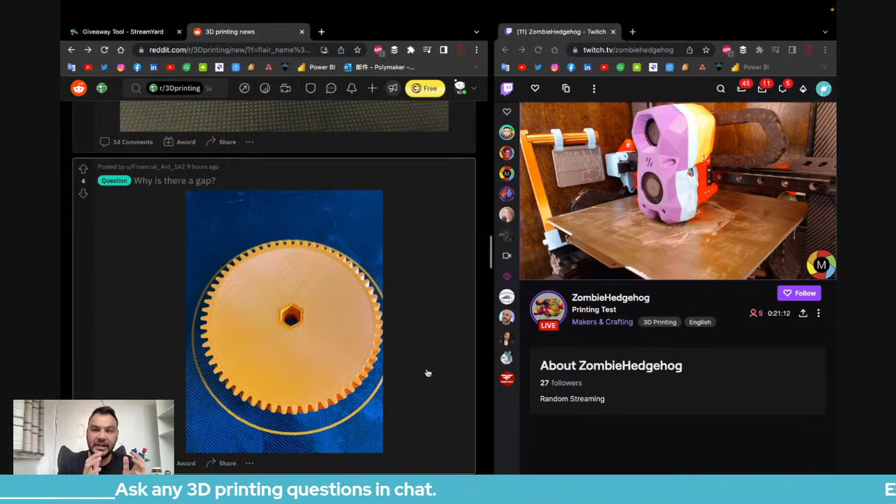The filament itself has a heat-resistant temperature of 140 degrees to avoid heat creep issues. So all of these are kind of what set Polymaker apart from other filament companies.

And then your second question: is there any practical or engineering filament I should try from you? I don't know what you mean by practical or engineering filament, but another good thing about Polymaker is you're going to have access to a large amount of data to make your own decision on what material is the best for you. So if you go on our website, us.polymaker.com, and then you click on material comparison, you're going to arrive on a Power BI. Let me put it in big screen for you. And then on that Power BI, you're going to have access to a lot of data.

So if for you engineering materials means a very rigid material, then you can check the Young's modulus and go PA6-CF is one of our most rigid materials. But if you check the wet state, then maybe you would look for some other material. So I don't know what is engineering material, but even just our PLA Pro could be an engineering material for you. Our Polymax PC could be an engineering material for you.

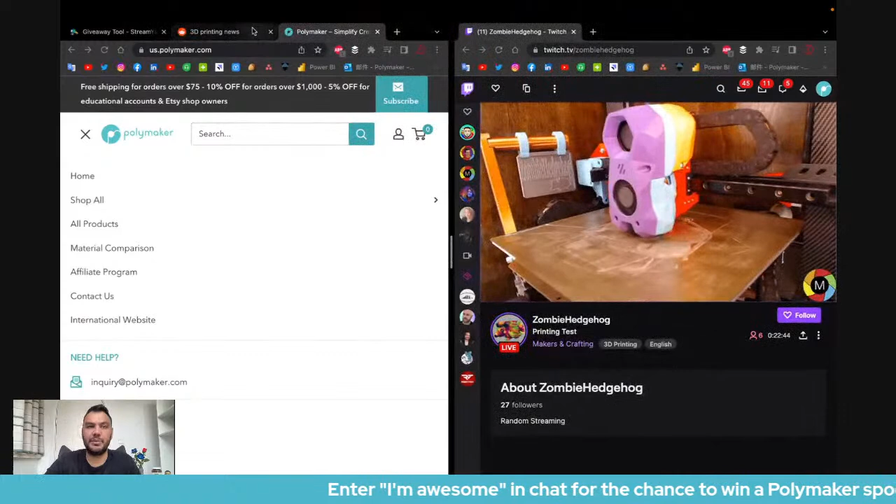We were also the first company that released a printable PC on desktop printers. So we wanted to bring engineering material to mainstream. We were also the first one that designed warp-free nylon based on the understanding of semi-crystalline warping issues. So there is so much that differentiates Polymaker from other filaments. The only warp-free nylon, the first tough PLA. We have our breakaway support, the first breakaway support, the first wood mimic that doesn't clog your nozzle. And I can go on and on with pretty much the whole portfolio. So hopefully that answers your question, Forrest Gibson.

Zombie, my suggestion is not to try Polymaker. You will not want to use another brand. Blah blah blah. Hey, what's up? Come out and PLA. Just come to see me. I will show you all types of Polymaker. Glow in the dark is fun, exciting, blah blah blah.

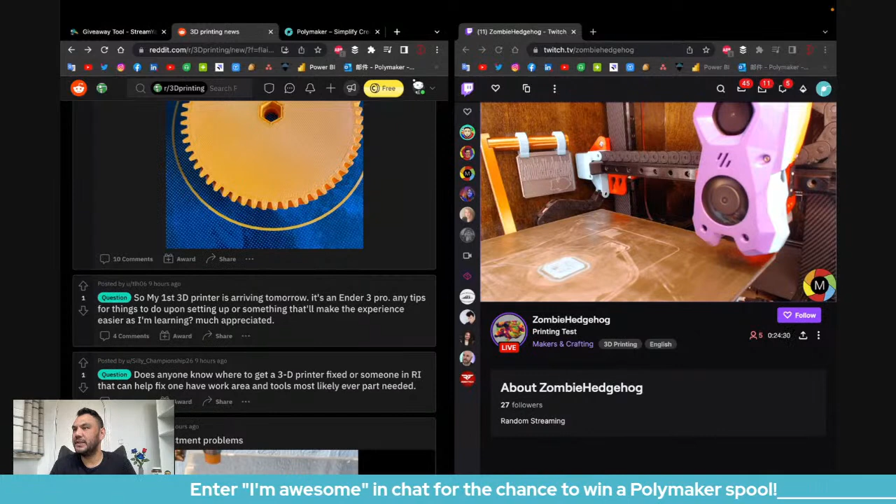Forrest Gibson, we design filament to solve problems. This solves me instantaneously. Exactly my type of thinking. I love those examples. We'll buy a shipment tonight. Awesome. Let me know how it goes. We have a Discord.

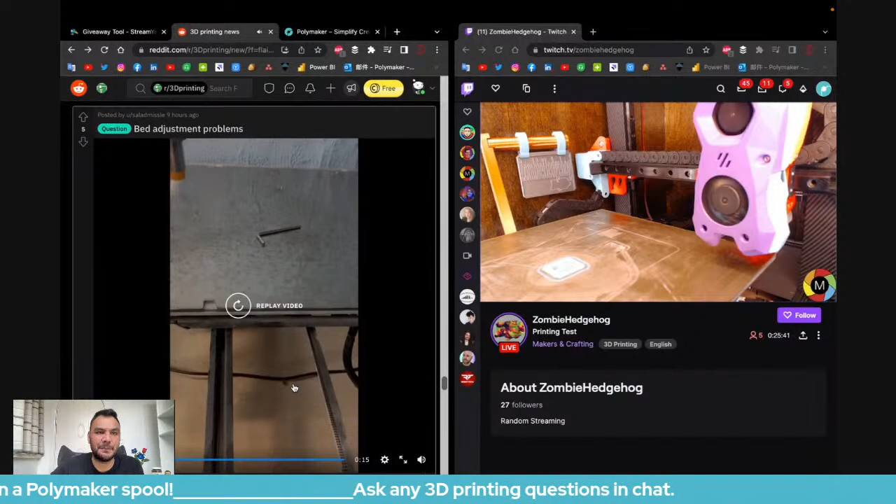Okay, great. Next, bed adjustment problem. Okay, so what type of problem does he have? That's really not good. It could be a piece of art to print on such a bed. That would be pretty fun. You check your hardware and then you check your screws, and then I'm not too sure what to say on this one.

Next on the list, is there a setting in Cura to generate supports that are easier to remove from the build? These supports surround the actual print and are near impossible to remove cleanly. Yes. Well, tree support, I guess, shouldn't have this issue like going around the print. And then you can customize your support so that you don't have this issue.

Oh, did it fail again? The TPU print? Yeah, looks like so. So what I was about to say.

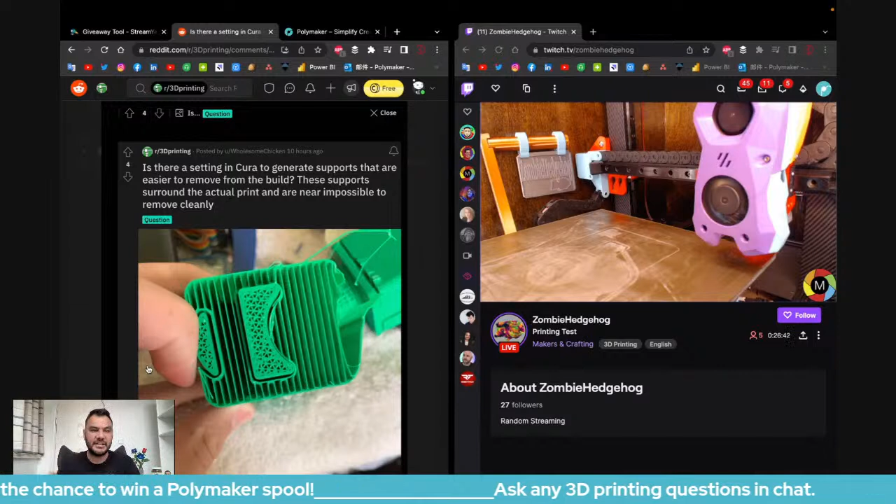Yeah, you can customize. So you have some pillars. What you can do in Cura is you can put a box, and then you can tell Cura to not put any support in that box. So you can make sure that there is a box to open your support, so that it's easier to remove. There are many ways of doing this. But usually, it's not that hard to remove. You just have to cut through.

Like when you print the animals I design, you will also sometimes have supports that go around the limb, and then you can just cut them. Should be okay. But yeah, like I said, there are ways to open those supports.

Well, it's really been an hour and a half. That was so fast. Oh, really? Okay, I would have thought it would be around 45 minutes, so kind of double the time. Yeah, a bit too fast for my setup. Yeah, I mean we can do some more tests.

Whoa, what is happening here? Whoa, that's not good. "I was printing, then suddenly the thermo thing detached. I did not notice the nozzle go crazy and smoke came out. I said PLA is burning in 214 weird then I put back the thermo thing and it was 350." Well, that's almost degradation temperature for polymers. "What am I gonna do?" Well, yeah, that's so dangerous.

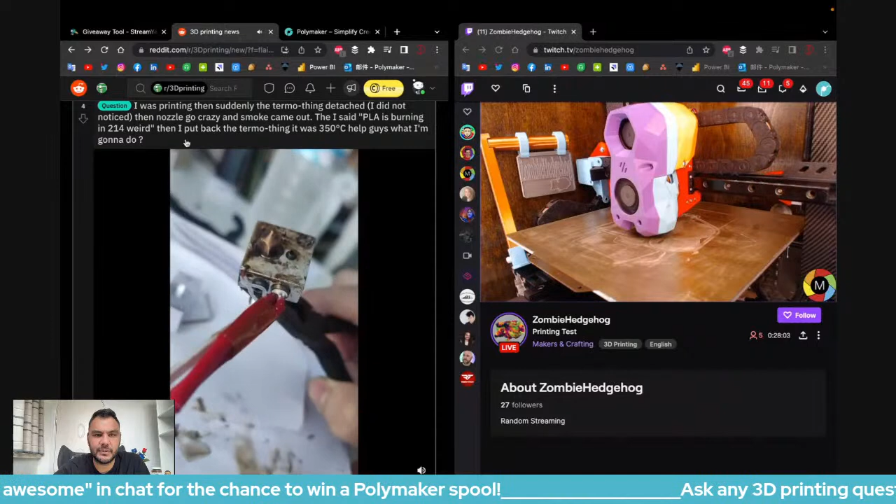I mean, the thermal sensor, if somehow it gets disconnected or something, then that's very bad. They should have some kind of safety that says, I don't know, if you have a huge difference between the thermal sensor and the command that you're putting on the resistor that is heating up, then if you are heating up for 1 minute and the thermal sensor is at 25 degrees, like room temperature, or doesn't give any data, then you should shut off the printer directly.

I mean, I don't even know why it kept heating up. They should have some kind of safety. That's very bad design. And that's not the first time I hear that a printer is badly designed for safety, by the way. "The first layer looked amazing though." Yeah, I guess the first layer is slower than the others, right.

"A good improvement for support is to make the Z support distance 1.5 your layer height." But that's impossible, right? You cannot do 1.5 your layer height. It's either 1, 2, 3. It has to be a whole number, right? Or can you? I mean, in my thinking, the slicer cannot do half of your layer height. It has to be a multiple of your layer height. Otherwise, the whole layer is at half your layer height, I guess.

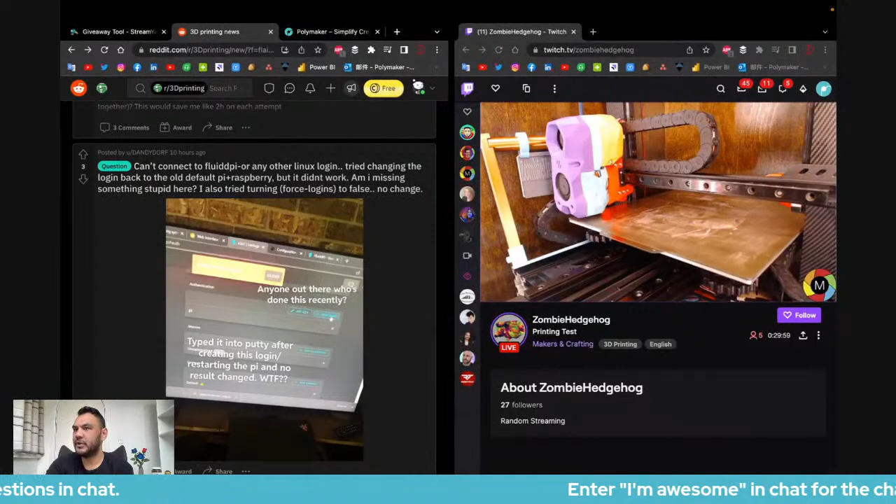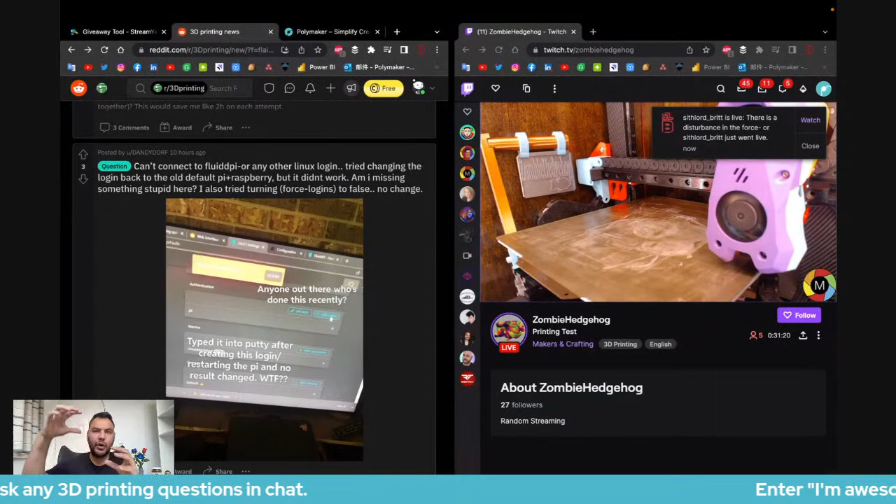Yeah, I mean, depending on what you mean by hot camera and what kind of stress, because nylons are not very good with creep, right? So if somehow it's a bracket to hold heavy stuff on your hot camera, then over time the bracket will deform, right? Maybe PA12 CF could help with that. But if that's the case, then Polymax PC would be better for the creep issue. "If your printer allows it, set up auto shutdown." Yeah, you should.

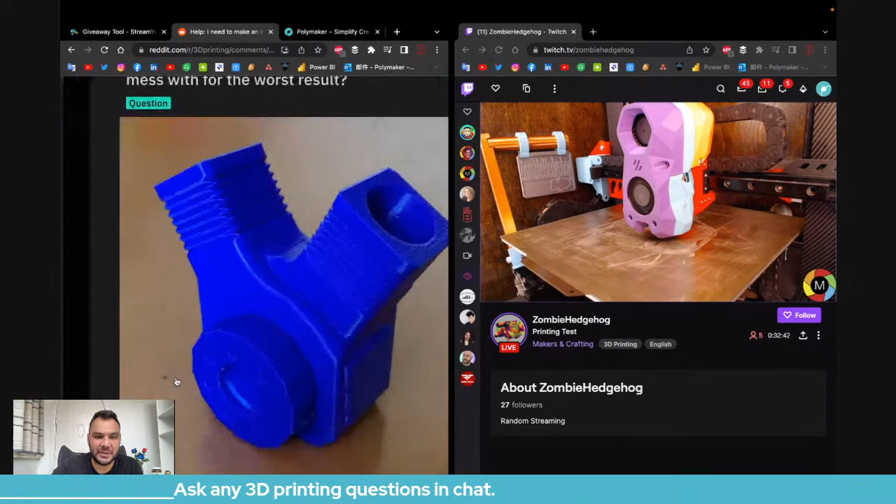That's interesting. I mean, pretty much any setting on Cura can end up with a bad print, right? Like, any setting, if you go to an extreme. I mean, it's usually hard to make a good print, but it should be very easy to make a bad print, no? Who has the problem of making a bad print, really? Who has this trouble? I wish I had this trouble.

Polymax PC, okay, noted. Good thought with the nylon. Yeah, try it. Depending on your printer also. I mean, Polymax PC requires an enclosed chamber, depending on what size you're printing. If it's fist size, then an enclosed printer, 40, 50 degrees inside should be good enough. If you're printing bigger than a fist size model, then maybe you'll have to. It depends on what printer you're using.

Flow at 150, temperature at 300, retraction 100 millimeter. Still haven't perfected bridging. Yeah, let's see what's going to be the best. This keeps happening. I don't know what to do. I've tried it all. This was done with my Ender 3 Pro and Cura slicing software.

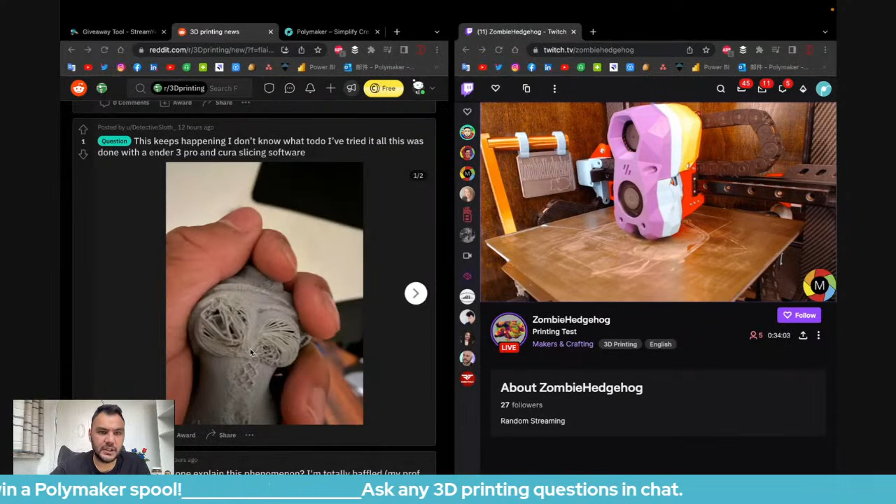Yeah, more shell. You need more shell. So for this particular issue, you need more shells. This will solve the issue. You need more infill and more shell. You can use gradual infill, in order to not have too much infill the whole way, and then you need more shell to properly do that rounded stuff. So that solves that issue, and then here, well, I guess this is just a support issue. We already talked about support.

What's that? Can someone explain this phenomenon? I'm totally baffled. We are using the Dyze Design Pulsar Extruder 1 nozzle with polypropylene. Oh, why does it do this? Okay. So that usually is a partial clog. Usually a partial clog is going to give that thing. But I doubt it with this extruder, because it's a pellet extruder and it's a pretty good extruder. I doubt there is a partial clog.

What could happen also is the viscosity of the filament is pretty high. Do you remember we were talking about elastic deformation in the nozzle? So maybe the fact that it deformed in the nozzle and then reshapes after the nozzle is creating a certain uneven stress that is kind of bending the filament a bit. So it could be this also. But it's pretty funny. That happens also on regular printers. I've seen this on regular printers as well.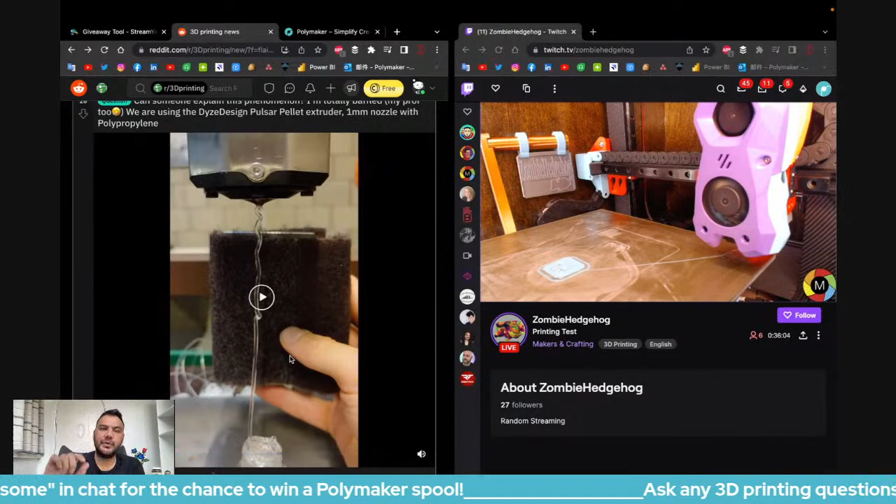It's usually a partial clog, which means if you're printing at a higher temperature, that will solve the problem. If you decrease the viscosity of the material, so I'm pretty sure here, if they increase the extrusion temperature, they will have less of an effect. And that could actually be a great proof for the elastic deformation of warping. If you have this on your printer, try to increase the temperature and see if that decreases the phenomenon.

Oh, is that this guy? This guy posted 2 times how we can help him to make a bad print. Oh, is that repeating? Repeating. Okay.

Nothing bigger than fist size. I have an enclosed Prusa pre-ordered, and a Bambu Lab X1 Carbon as well. Oh, really? I think you're gonna be happy with that Bambu Lab. I've seen a lot of good things, and we spent 4 hours, I think, in the last stream trying to dissect that Bambu Lab, and we haven't even finished. I think we barely scratched the surface in that 4-hour stream. My goal is to set up a 300 millimeter enclosed Core XY style printer.

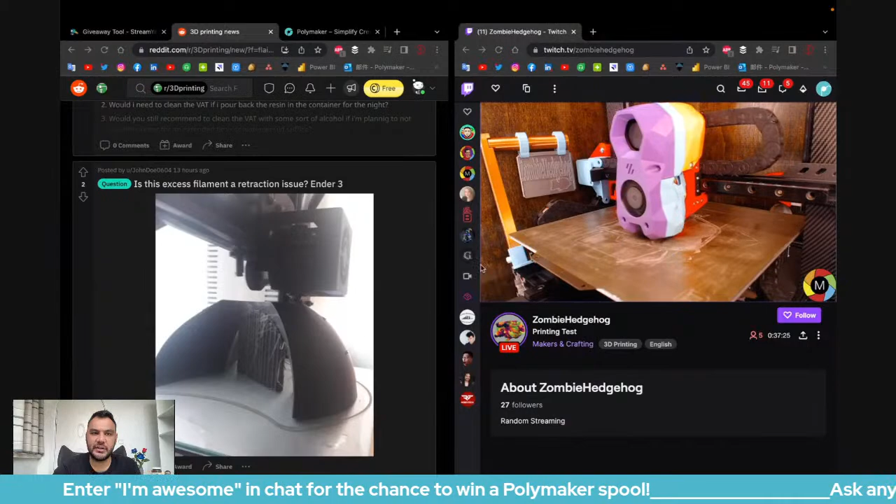Temperature is too high. I would say the opposite, Rover. If you're talking about that strange extrusion here, I would say the opposite. Okay. Let's do a couple more.

Is this an excess filament retraction issue? So you're talking about the spider web here, right? Hey guys, up until yesterday, I've never had issues with my retraction setting on my Ender 3, blah, blah, blah. Now it started leaving this leftover on my print. Is this because of my retraction setting? Kind of random that the setting I've always had started working poorly all of a sudden. Okay, so for me, this is called spider web.

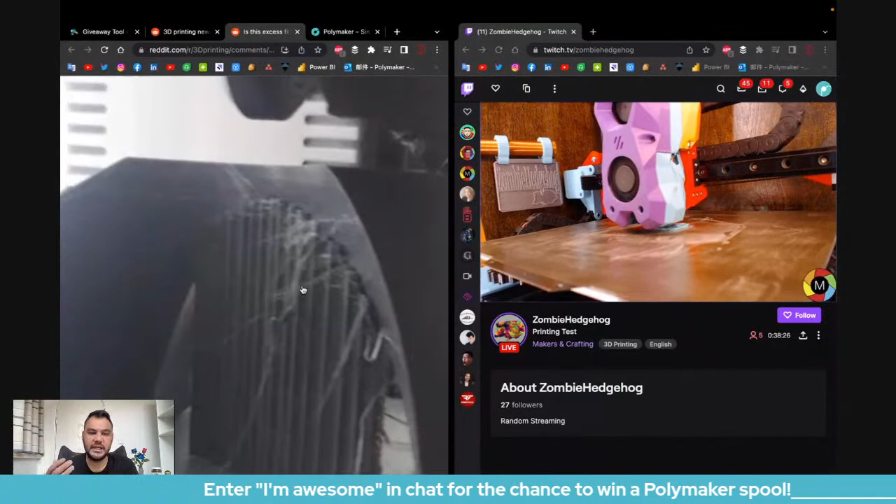So you remember, for me, oozing, stringing, and spider web are different. They are all different. We talked about oozing on Discord. We talked about stringing on Discord, how to solve it, what's the root cause, and spider webs. The root cause.

I like how Zombie put the dinosaur looking at us, going back and forth.

The spider web for me is caused by the fan blowing the polymer away from the nozzle and then creating these spider webs, right? So to solve this, there could be a moisture issue. The moisture is going to enhance the fact that the fan will be able to blow on the polymer and create this string, and it could be solved by, let me check.

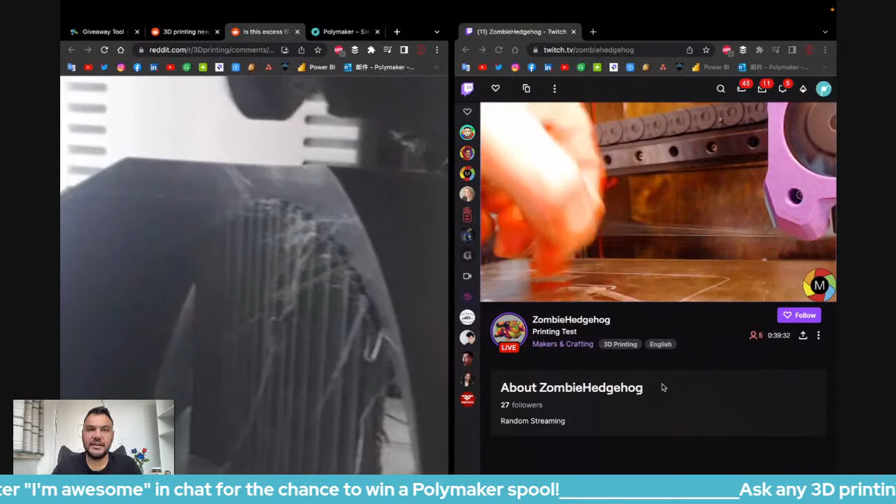Lower temperature, I guess. Lower temperature should help for these. But to be honest, if you don't dry the filaments, then I think it's very hard to get rid of them, except if you shut off the fan. Actually, to prove the theory, if you have this issue, you can shut off the fan and then see if you still have it. If my theory is correct, you won't have this issue anymore if you shut off the fan, because for me, spider webs come from the fan.

Well, I will have to go back and watch the stream. Yeah, I mean, it was a Hangout stream, but somehow we got caught by a lot of things. Like I learned what was Core XY in detail, and we did a lot of things. It might be a little bit long to rewatch, but you're welcome to join our Saturday stream. It's more of open talk.

Bring down the temperature to reduce the spider web. Yeah, that can also work. I had a nozzle clog on me, removed it from printer, heated the nozzle in the stove flame or blowtorch, and used a thin wire to remove excess plastic. Yes. Bottom is a bridge. Oh, it's a bridge. It was bridging. Okay. LPT don't pause a TPU print. I don't know what LPT means.

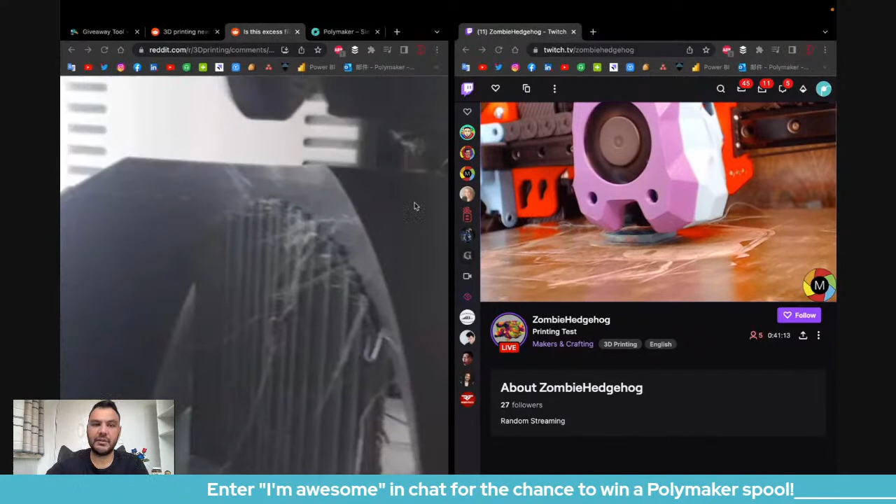Even the spaghetti didn't print right. Can you have spaghetti issue on the SLA printer? I thought spaghetti issue was only for FDM.

Formlabs, blah blah. Okay, printer adding weird lines in infill. What are they? Yeah. So this is typical in Cura. They don't use retraction when moving inside the print. So it's typical. It doesn't matter. It's not going to affect anything. But if somehow you want a perfect print inside, then I think there is a setting that forces that retraction, if I remember well. But pretty much all Cura prints, especially with triangle infill, will have this. It's like part of the print. I've seen this everywhere.

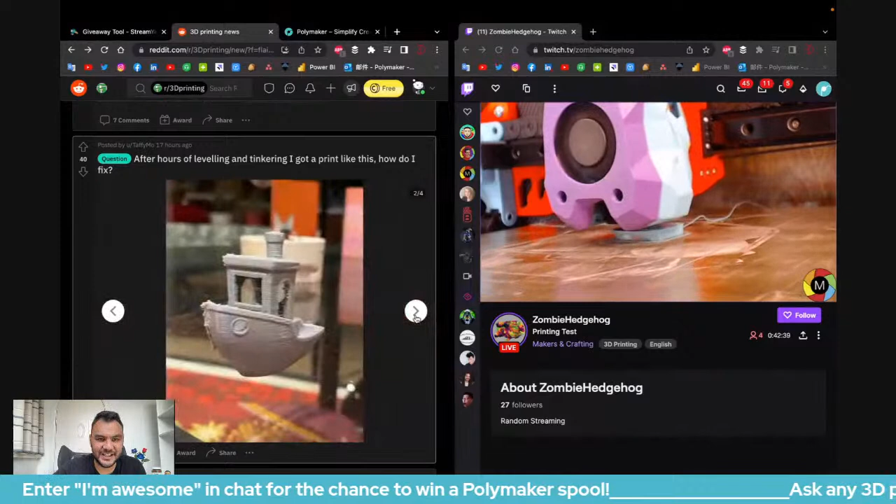Well, that's a very interesting Benchy here. After hours of leveling and tinkering, I got a print like this. How do I fix it? Well, that's a pretty bad print actually. Okay, let's diagnose. So it looks like there's a big difference between one side and the other. Yeah, I'm wondering. It looks like Zombie has a similar print. I'm not sure. It could be so many things. The interesting part is one side is kind of good, and the other side is very bad.

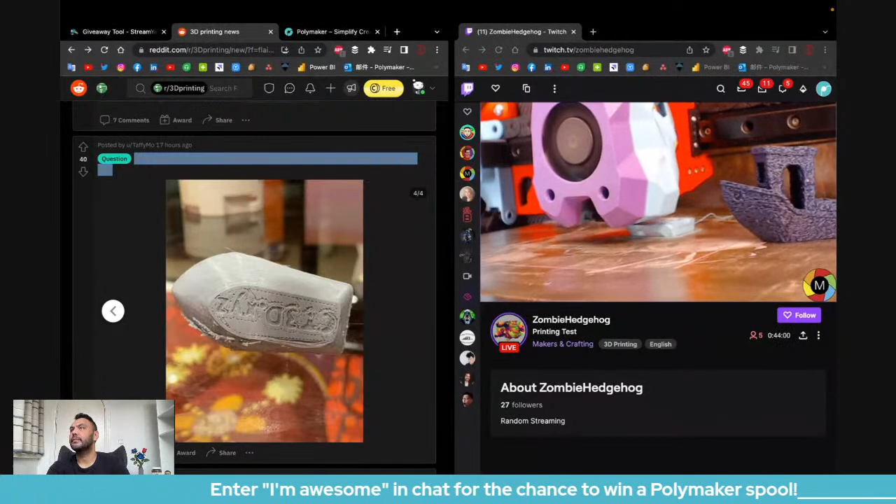So yeah, I'm not sure. It could be so many things. It could be temperature related. It could be filament related. It could be the printer. There's too many things. I'm interested in seeing if Z-Hop makes better prints than not. In my experience, Z-Hop makes worse prints. Budget fuzzy mode.

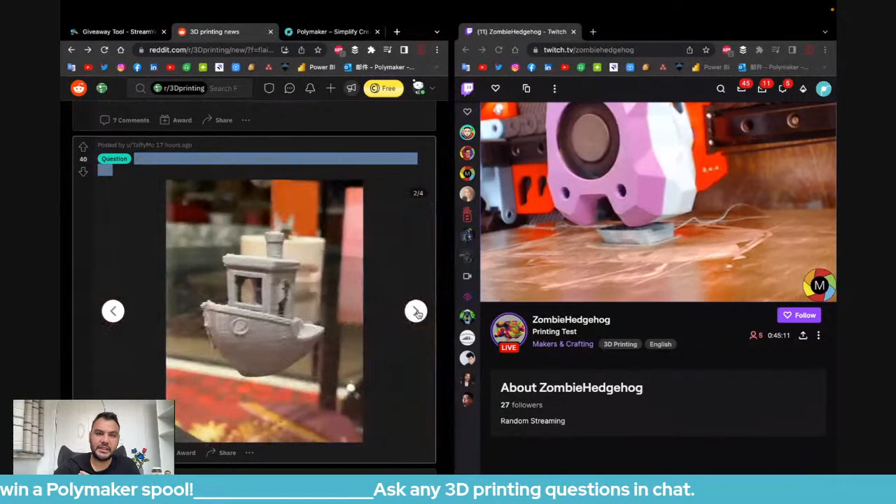Did they have a huge fan blowing on one side? It could be. Usually that's one thing that comes to my mind. When one side is worse than the other, I'm always thinking about fan because most printers have a one-sided fan. So it could be. Crappy fan shroud, yes. I'm guessing high temp on a single-sided fan for sure. Yes. Fan is a good starting point because of this double-sided effect. Single-sided fan isn't going to do that. Z-Hop makes things worse. Yeah, I agree. Maker is right. I have the same experience.

They are here for my test print. "Z-Hop is a terrible option to enable." "Z-Hop just seems so bad." "I tried it and I didn't think it was worth it." Yeah, great. Well, it looks like we all have the same experience with Z-Hop, right? I don't know why they introduced it.

I think they introduced Z-Hop to avoid, if you have a print that is curling, catching on the print. I think that's why they invented Z-Hop. But if your print is curling, then you better solve that instead of compensating by jumping over it.

"Polymaker, in your opinion, what is the best 3D printer and why?" Woo! That's, again, that's one complete stream question. But off the top of my head, I think for me, if you just get into 3D printing, get a cost-effective printer. Cost-effective means a good value out of what you're going to pay, right?

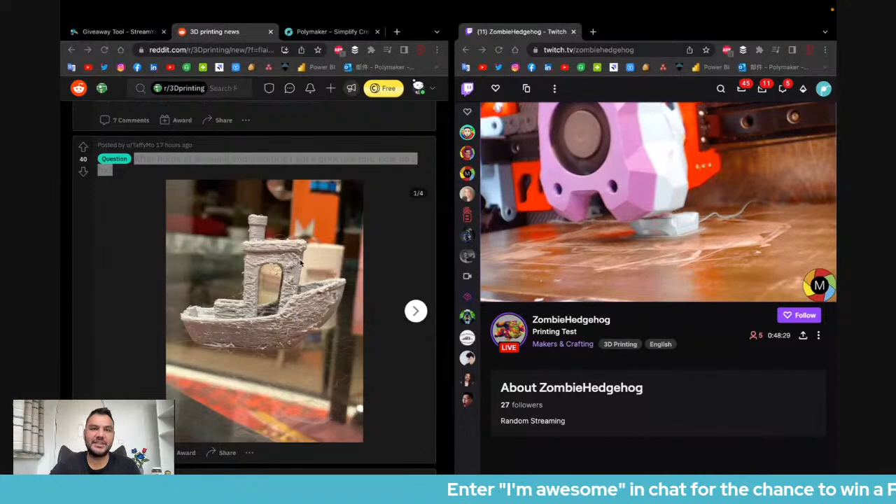"The only issue I have with movement is for surface movement. My nozzle leaves marks. The best is Prusa Mark III." I have never printed with a Prusa, like never. Not even the original, I have never printed with a Prusa.

I mean, what I usually say to people is, if you're really interested and you consider 3D printing as a hobby, then pretty much any printer would be good enough, because if it's a hobby, you will have the motivation to tinker and to modify your printer to make it good. If 3D printing is not a hobby, then you better put more money and get a printer that works. And then yes, the Prusa might be a better option.

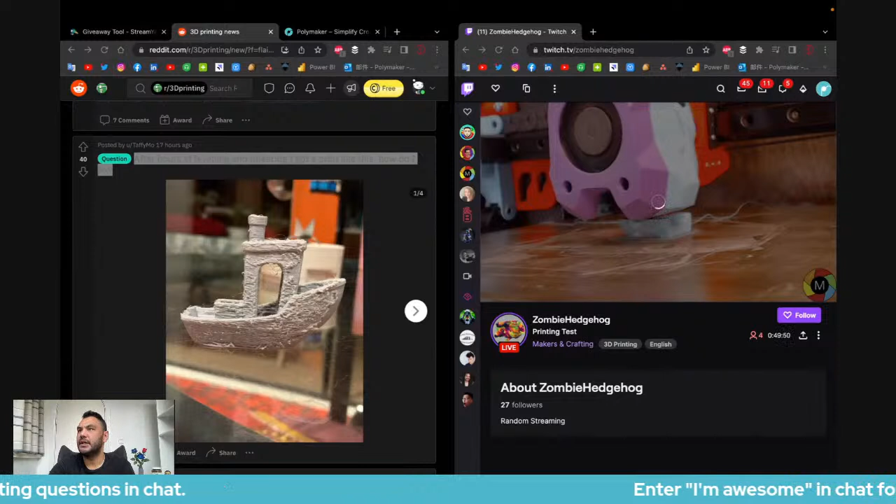There are other options, or even the Ultimaker if you're more in a professional environment and really need that ecosystem. But yeah, it depends on so many things, so that's why I say it's a big topic. "Z-Hop helps a lot with stopping from knocking over tall support towers." Yeah, but again, Mark and Draka, if there's nothing that is curling, then theoretically it's not going to knock over anything, right?

"And the Ender 3 is kind of junk now. Many other brands include a lot more for the price." Yeah, if there are other brands that are more cost effective, then yes. "Sunlu S8." Yeah. "Anycubic Vyper, Kobra Plus are the best out of the box." Yeah, it's true. It's true that there is more and more choice.

"Anycubic is very solid right now. My default recommendation." "They switched Ender parts for cheaper copied parts, and they are much lower quality now." Oh, okay, I didn't know that. The Biqu, yeah, there are some good printers in the Biqu lineup.

Geeetech. Oh, it's been a long time since I heard about Geeetech. A30 and a resin printer for them. I have the Pulse XE, Pulse from MatterHackers, right? Which is basically a Prusa clone and it's a very good printer. Yeah, I've heard good things about the Pulse printer as well. How? It's not like it's magic or anything. It's just a printer, but it's so commonplace that surprises me.

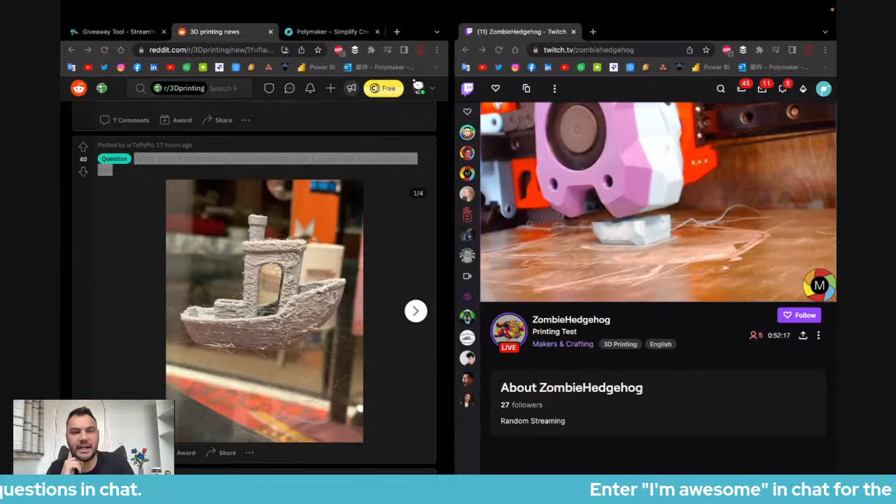Yeah, I mean, all printers, to be honest, they are kind of, I don't know. Pretty much all printers that I've tested, maybe not that much, right? Maybe around 15 to 20 different printers I've printed with, and all of them you could print something, but some of them lasted longer than others. Some of them, even today, are still reliable. Like the Ultimaker, even right now, the old Extended 2 that I have are still printing pretty good.

And some of them, like one Ender 3 that I have, after 2 months it started acting up. I started to have issues that I don't know where they came from. And then I don't have much time to go and change some stuff. So pretty much all printers were working well, but some last more than others. I would put it this way.

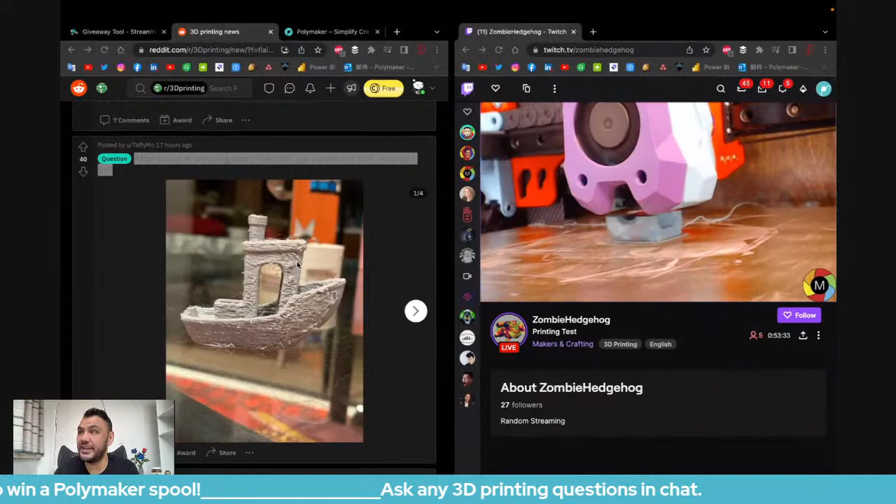I started with a MakerGear M2. Oh, MakerGear. MakerGear is an old company now, right? They were one of the first, no? If I remember well. But I wanted a dual extruder machine, so I bought a Raise3D. Oh, you go from MakerGear to Raise3D? Oh, the E2. Okay, well, still.

How have you not used a Prusa? Sorry, delay. Because Prusa is not available in China. Or, I haven't checked in detail, but it's not that accessible in China. Our European office has a Prusa, but we don't have any Prusa here in our Chinese office. The X1 looks to be promising for just print and go printing. Time will tell. Yes, I agree. I'm also looking forward to that. I learned a lot with that printer and the A10 machine.